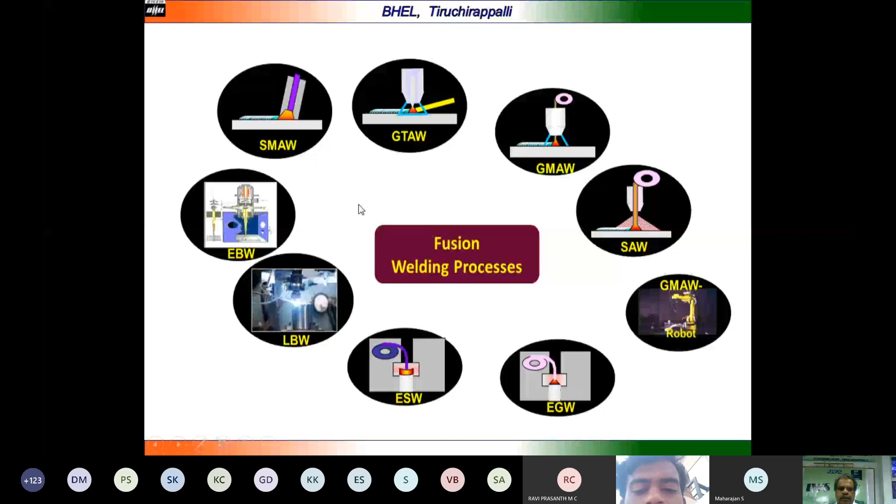Coming to the solid state welding processes: all resistance welding processes, projection welding, resistance spot seam welding, flash butt welding, friction stir welding, MIA welding - all these constitute the solid phase welding processes.

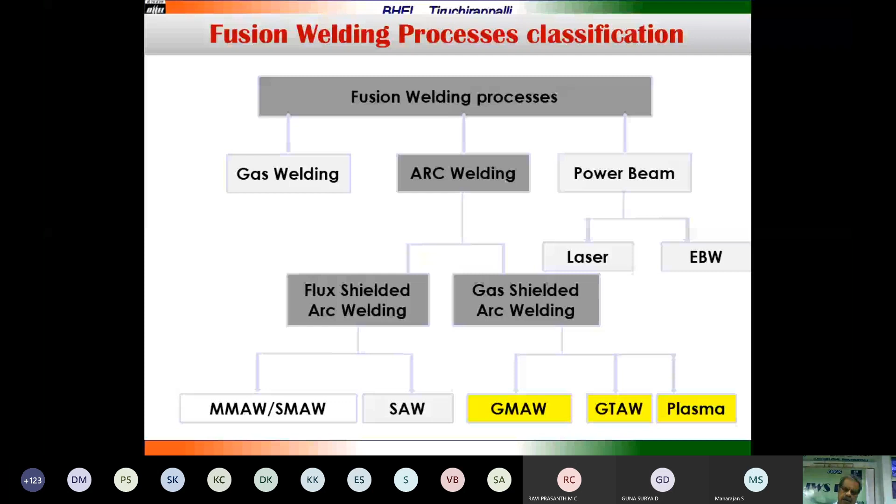For fusion welding processes, what is the source of energy? If gas is the energy source, it is gas welding or beam welding, as we discussed. Mainly we work on electric arc welding, which can be classified as flux shielded arc welding as well as gas shielded arc welding processes. Our focus now is on gas metal arc welding, gas tungsten arc welding, and plasma arc welding, where we will have an overview of the fundamentals of the process to refresh ourselves, and then see some of the advances happening in the process.

Gas tungsten arc welding process can be classified as tungsten inert gas welding or TIG welding, and plasma arc welding, where the tungsten electrode is used for transferring energy. Gas metal arc welding can be called metal inert gas welding, MIG welding, and metal active gas welding.

So first let us see the fundamentals of gas tungsten arc welding. It is called TIG welding, argon arc welding, or helium arc. The heat source is an electric arc between a non-consumable tungsten electrode, as you see on screen, and the workpiece. The filler metal is added independently, or it may be an autogenous welding, depending upon your design.

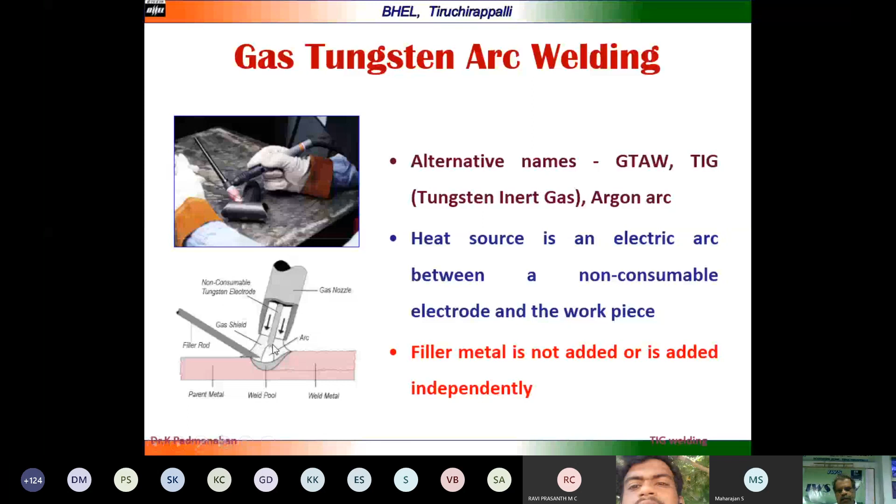The equipment for TIG welding includes the power source, the welding torch, and the gas supply unit, whether it's argon gas, helium gas, or an argon-helium mixture - whatever shielding gas you are using - and the gas control, gas flow parameter controls, flow meter and pressure valve. Then we have a control system.

Then the torch - if it's a water cooled torch for heavy duty applications, it will have a water supply system, along with a high frequency unit. The uniqueness of TIG welding is that the arc can be initiated using a high frequency unit, where the tungsten electrode need not touch the job to start the arc. That is a major advantage of the process, which is why it is used as a quality process.

This high frequency arc welding uses 3000 to 5000 volts current and 2.5 to 3 million hertz frequency given as feed, and then the arc is initiated. Once the arc is initiated, the welder can continue the arc and then continue the welding.

It uses a non-consumable tungsten electrode, and helium and argon, or helium or argon, used as shielding gas. No slag or spatter is present in the process, and welds can be made with or without filler metal, producing a high quality weld.

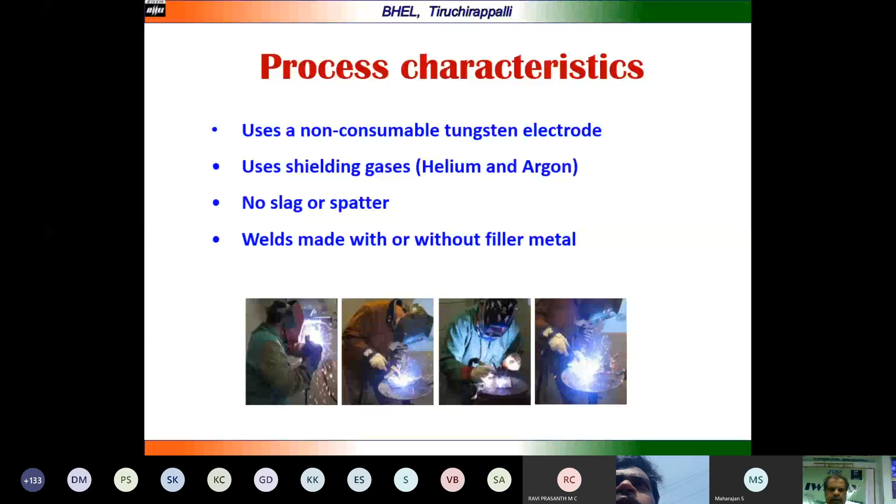The advantages are it is a clean weld process, since there are no fluxes involved, and it is good for root pass welding, especially in pressure parts and line pipe welding everywhere. It can be used for all position welding, with low heat input, therefore chances of distortion are very low. It is best for aluminum and magnesium alloys. Nowadays friction stir welding is taking over for aluminum as one of the best processes, and it produces very high quality and superior welds.

But along with the advantages, there may be some limitations or disadvantages with the process. The equipment cost is a little bit higher compared to the SMAW process, because of the high frequency unit and the water cooled system attached.

Higher welding cost due to shielding gas compared to SMAW process. The deposition rate is very low in conventional TIG welding, and the welding speed is also very low. In manual TIG welding, hand movements are restricted because the welder has to coordinate both hands with eye coordination, which makes it a slow process.

Higher welder fatigue occurs because hand-eye coordination is very critical for this process, since the welder has to hold the torch in one hand, and if filler wire is added, hold the filler in the other hand, then manipulate the welding. It requires highly skilled welders, and it is less economical than consumable electrode arc welding for sections more than 3 mm. That is why usage is restricted to root pass welding, or at worst, hot pass over the root pass welding.

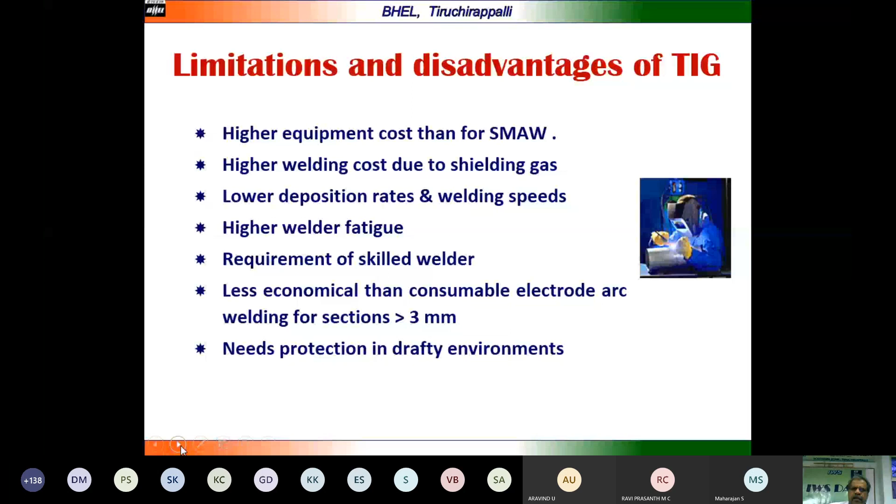What are the polarities or currents we can use in TIG welding? We can use DC electrode negative, electrode positive, as well as AC current. AC is mainly used for welding aluminum alloys because of the self-cleaning action happening there, and welding also happens there. The advantages of DC electrode negative, electrode positive, and AC are shown pictorially here on the screen.

If you take DC electrode negative, the positive ions move towards the electrode and the electrons come towards the job, and 70% of the heat is available at the work part, and 30% at the electrode end. That's why we get deep penetration and a narrow bead width, and it has excellent electrode capacity -- even using a 3.18 mm electrode, you can go up to 400 amps current, because only 30% of heat is available at the tungsten electrode. Coming to electrode positive, there is oxide cleaning action.

Electrons moving away from the job clean the oxide layers over the job, and then positive ions come and make the penetration. Here, 30% of heat is at the work and 70% at the electrode end. Because of that, we get only shallow penetration and a wider bead width. But look at the current -- even with a 6.35 mm electrode, we can use only 120 amps current. That is the issue here.

AC is balanced -- 50% of the time it is DC electrode positive and electrode negative, so both benefits can be obtained. 50% of the time the job gets cleaned, and 50% of the time welding is done. Heat input is also distributed equally between the job and the electrode, and the penetration is medium. For a 3.18 mm electrode, we can use up to 225 amps current.

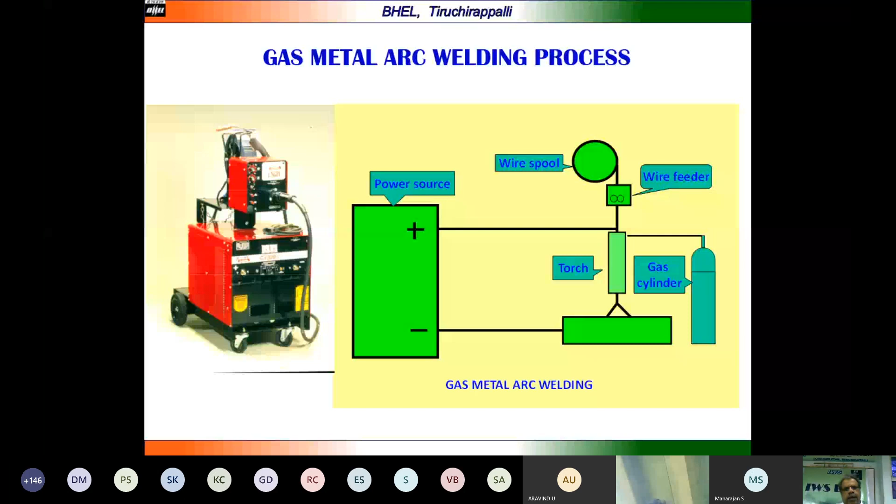The gas metal arc welding process can be classified as metal inert gas welding process and metal active gas welding process. Inert gas welding is when you use purely inert gas like argon or helium, and it can be used for welding non-ferrous metals, especially aluminum and copper. MAG welding with 100% CO2 or argon plus CO2 mixed gas can be used for all types of ferrous materials and steels.

How much percentage of argon and CO2 can we use? For conventional structural welding, we can use 80-20%, that is 80% argon and 20% CO2. When it is for pressure parts, made as per ASME or other codes, working at high pressure and high temperature environment, it is better to go for 90-95% argon. So increasing the argon percentage is for pressure applications, and for structural application we can have 80% argon, 20% CO2. Mainly for automotive components 80-20 is used, but when going for pressure parts like ASME, the CO2 ratio comes down.

The special features of the GMAW process are high current density, and the arc is a self-adjusting arc. Because of the current feed, the arc length can be maintained - this is a property of the process. If the wire feed is more, the current will slightly increase and maintain the arc length. If the wire feed is less, the burning rate will slow down, and the arc length can be maintained easily in the semi-automatic welding process.

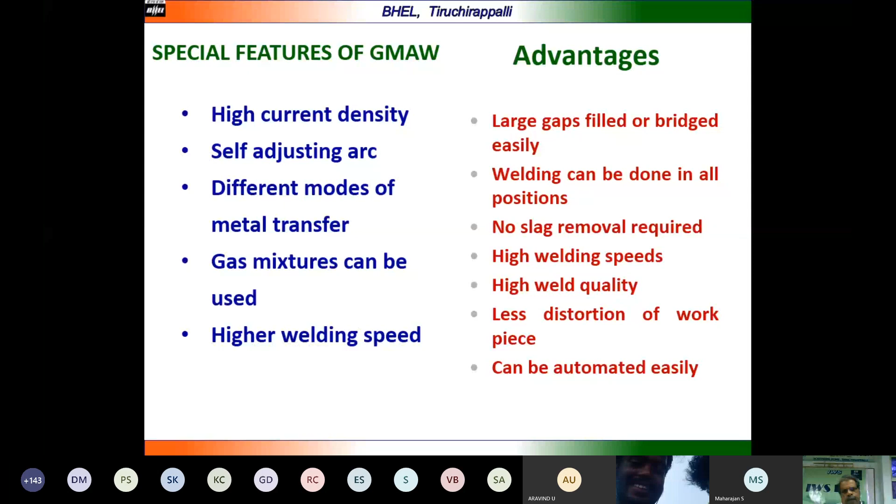The important process parameters are current, voltage, standoff distance - the distance between the tip of the electrode and the job - and the inductance level and gas flow rate are very important parameters when working with this process.

As mentioned, there are 3 modes of metal transfer: short circuit transfer, used for low current and low thickness jobs; globular transfer, which is intermediate; and spray transfer mode, which is continuous. You can see the difference in how metal is getting deposited in all 3 modes.

Watching the videos, in the first one the metal droplet forms, gets short circuited, then gets detached - it's a slow welding process, but it can be done in overhead position also. Globular is in between, but we normally don't use the globular welding process. For productive work, spray arc welding with spray transfer is mainly used.

You can see continuous spray of metal droplets into the weld metal. Because of that, the weld quality and weld metal deposition rate are very high, and very high current can be used with this process. But short circuit transfer can be used in overhead position also. This shows the voltage and current region schematically for short circuit, globular, and spray transfer, and the transition where globular transfer converts to spray transfer for high productive applications.

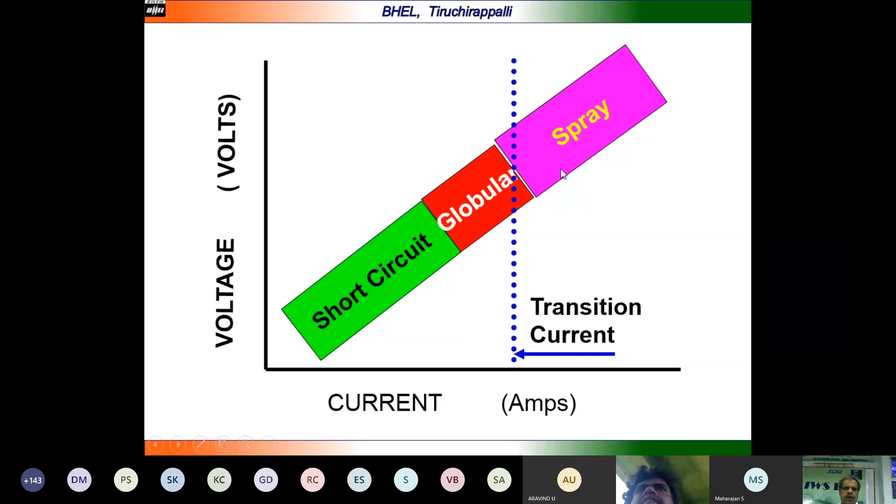The next process in gas shield welding is plasma welding. It was developed in the 1950s in the USA using helium, and in the former Soviet Union they did it with argon. It is sometimes known as tungsten plasma welding. Here the difference is there is a tungsten electrode and plasma gas, and heat is transferred through the plasma gas, with filler wire added. This can be used for surfacing, cutting, and welding applications, and the protective shielding gas is given through the torch, so the torch size will be a bit higher. You take the plasma gas as well as the shielding gas, and welding, cutting, or surfacing can be done depending on the need and parameters.

What is the difference between TIG welding and plasma arc welding? In TIG welding, there is a shielding gas flow, a tungsten electrode, and the arc is transferred between the electrode and the job, and the welding happens here. The temperature is less than 15,000 degrees Celsius.

In plasma arc welding, the temperature can go up to 30,000 degrees Celsius. You can see the construction of the torch here: the tungsten electrode, the plasma gas emanating from there, and the shielding gas providing protective shielding to the weld pool. Plasma arc welding is basically an extension of the TIG welding process.

The arc gets constricted by a nozzle and transferred to the base material, and the plasma beam consists of an accelerated ionized gas jet, as shown on the right hand side, and this is a tungsten arc.

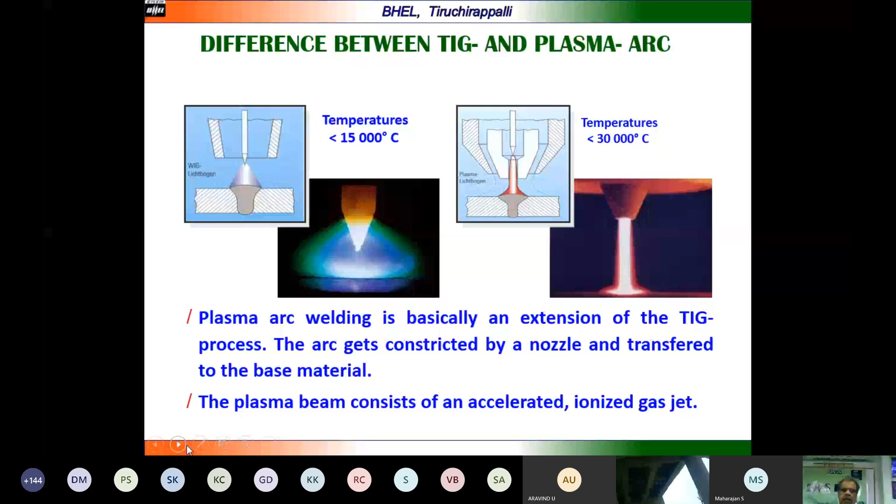The arc is independent of the workpiece, and the workpiece does not form a part of the electrical circuit. It has comparatively less energy density compared to transferred plasma arc, and is employed for applications involving ceramics or metal plating and spraying. A non-transferred arc is initiated using an HF unit in the circuit.

Coming to the transferred arc, it possesses high energy density and plasma jet velocity, employed for cutting as well as melting metals like carbon steel, stainless steel, and non-ferrous metal. It can also be used for welding at high arc travel speeds.

For initiating a transferred arc, a current limiting resistor is put into the circuit, which permits a flow of about 50 amps between the nozzle and the electrode, and a pilot arc is established between the electrode. Then the pilot arc touches the job, main current starts flowing, and then the plasma arc is initiated.

High energy density keyhole mode plasma welding is used for deeper penetration, and high arc stability can be achieved by this process. Weld quality is insensitive to the arc length. No tungsten inclusion is possible in the weld, which can happen in the TIG welding process because the tungsten electrode comes into contact with the job.

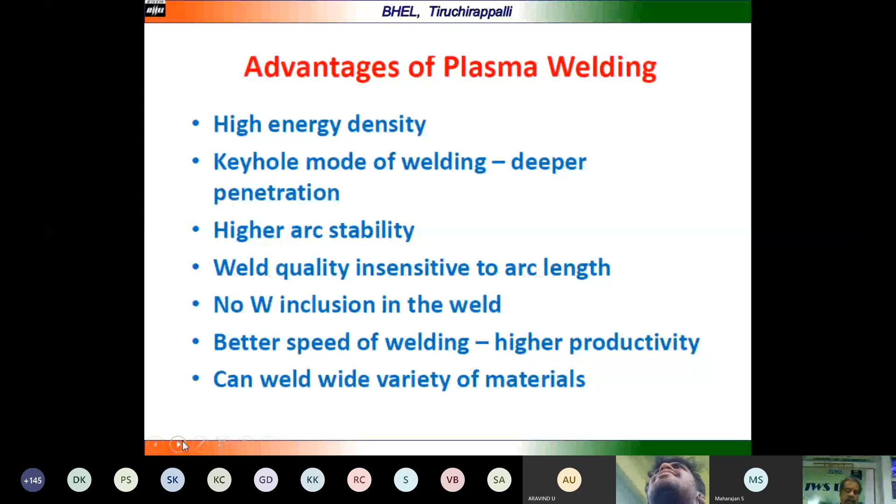Advantages include better speed of welding, ability to weld a variety of materials, and cut and weld surfaces. Limitations: relatively expensive and complex equipment because of the torch and the shielding gas, plasma gas, everything. It has complex welding procedures to establish, less tolerance for fit-ups, and higher operator skill is required compared to GTAW. Orifice replacement is necessary at intervals in this process.

Plasma gas can use argon helium mixture or argon hydrogen mixture, depending upon the application. For all metallic materials, argon can be used. Argon helium mixture can be used, and argon hydrogen mixture can be used for unalloyed and austenitic steels.

AC and DC can be used. Shielding gas is required: argon, helium, hydrogen, or argon-helium can be used depending on the requirement, because helium gives deeper penetration while argon does not give that much deeper penetration. But the quantum of helium gas consumption will be more compared to argon in the case of TIG welding.

So when you want high penetration welding, or deeper penetration, you have to go for helium gas. For example, to weld a 7.4 mm thick aluminium AA2219 aluminium alloy with square butt edge preparation without root gap, and the weld should be completed in a single pass, then the shielding gas we use is helium gas, and we establish the parameters.

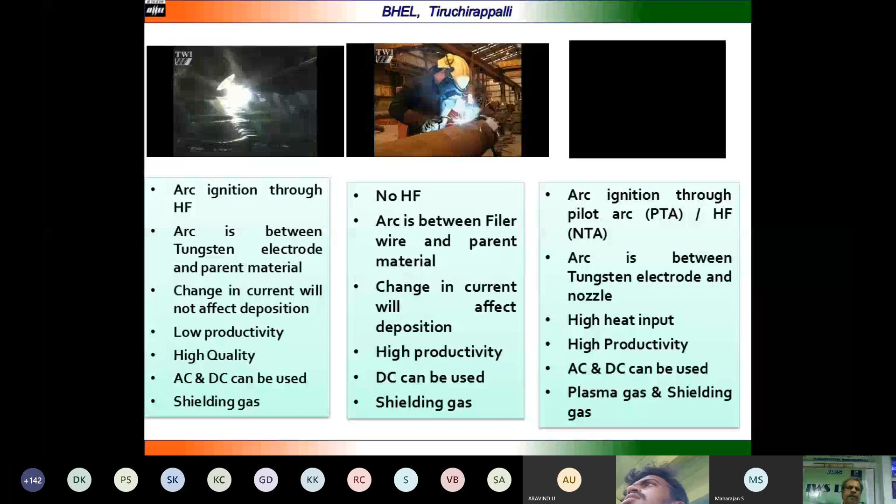So for deeper penetration and good quality weld, we can go for helium, but the cost is high and the gas consumption is also high there. But in argon, there is commercially pure argon available.

High quality pure argon is also used for nuclear applications. Argon is cheaply available and widely used, and it's better to use as much argon as possible, slightly sacrificing penetration, but by adjusting parameters we can achieve it.

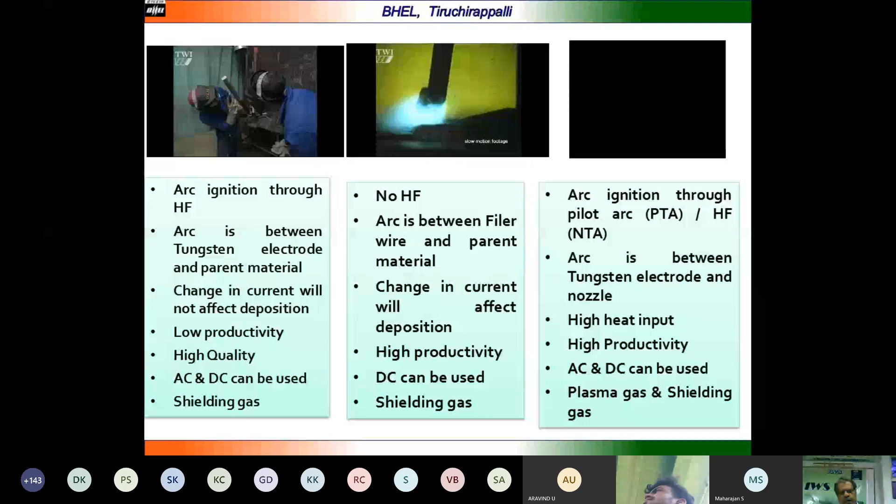Coming to the GMAW process, there is no high frequency unit. The arc is between the filler wire and the parent metal. There is a change in current because any change in current will affect the melting rate, and the deposition is going to get affected. It's a very high productive process, and DC, direct current, can be used. The shielding gas can be argon, helium, argon-CO2 mixture, or 100% CO2, depending upon the application.

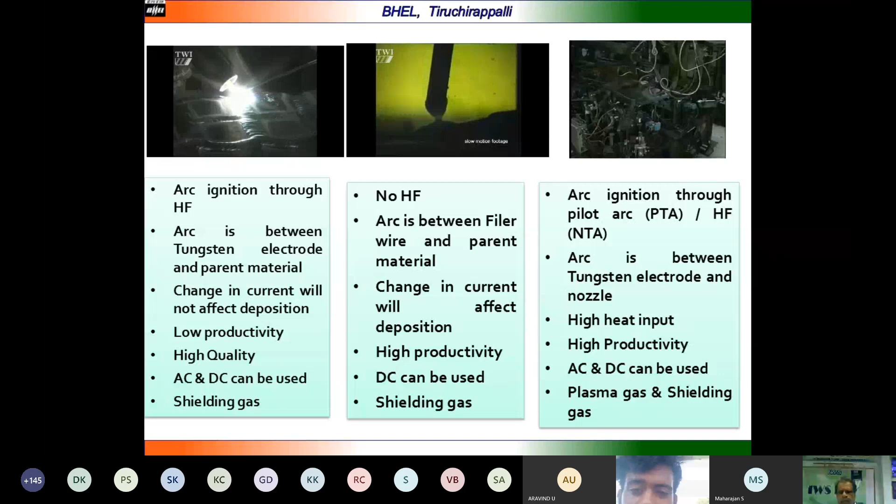Let us take the advances in the GTAW process. We'll have an overview, then move on to the GMAW process, and finally to plasma welding.

Pulsed TIG welding is the first development in the TIG welding process. In place of conventional TIG welding, where continuous current flows, here we have, as in any pulse mode, a base current and a peak current, with base current time and peak current time.

So more heat input can be given, heat density can be given, but overall lesser heat input goes into the material, avoiding heat input related defects at a later stage.

In pulsed TIG welding, the number of pulses will be in the range of 0.2 to 20 hertz. Background current is a lower level of current where heat is dissipated, in the range of 10 to 90 percent from the peak current, and the on-time can also be set. By varying these parameters, we can get very good welds using the pulsed TIG welding process.

Advantages: deeper penetration can be achieved because we can go to very high peak current for a short time, and the metal can be deposited with lower distortion since total heat input is very low. Bead geometry can be controlled easily, and because of the low heat input, mechanical properties are much better than conventional TIG welding. The weld can be frozen quickly, and solidification happens easily.

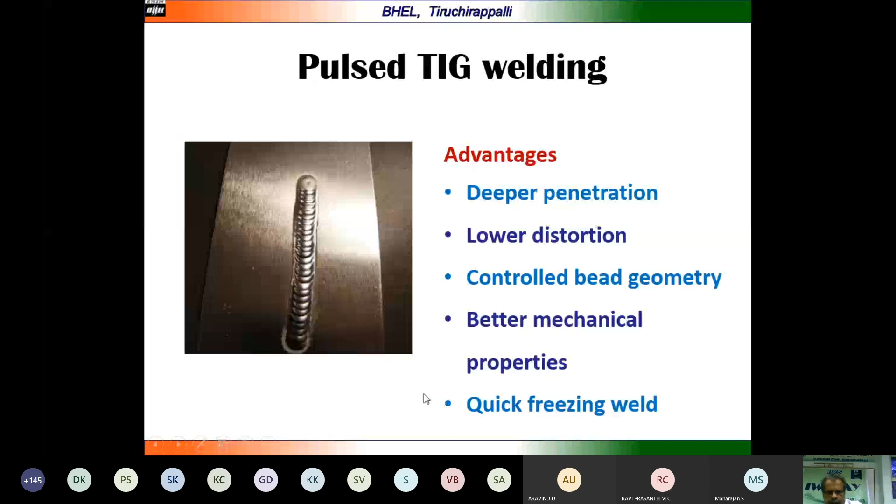The next development in TIG welding is orbital TIG welding, needed for in-situ welding of tubes and pipes, especially welding in 5G position, where the job is stationary and the hand must move to do the welding. Instead of manual welding, the torch can be rotated to complete the welding. This is called orbital TIG welding, and it is much suited for tube-to-tube sheet welding.

But once the parameters are set and established, it produces a high quality weld continuously without any problem, and we can rest assured about quality. Much of the radiographic quality welding for tubes and pipes in-situ is done using this process.

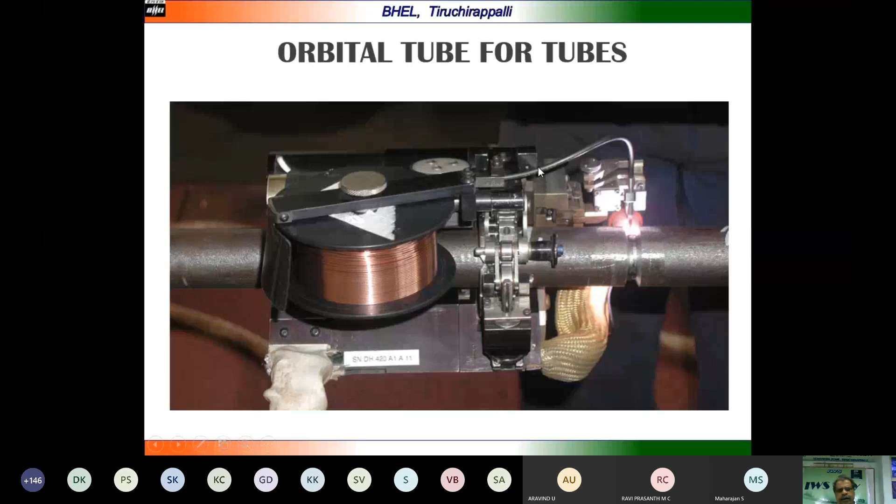Some of the equipment available for orbital TIG welding of tubes, shown here in a closer view. You can see the welding tungsten electrode, the arc, and the wire spool, a small amount of wire on a smaller size spool, which is fed into the weld. This is a head rotating system where the head rotates and the welding is done. Here's another view of the closed arc.

Smaller diameter tubes, from 3mm to 12.4mm, can also be welded using this process. It is orbital TIG welding for pipes. What we are seeing here, similar tubes, the pipe can be bigger size, and the head moves over the ring, with welding done in many subsequent passes.

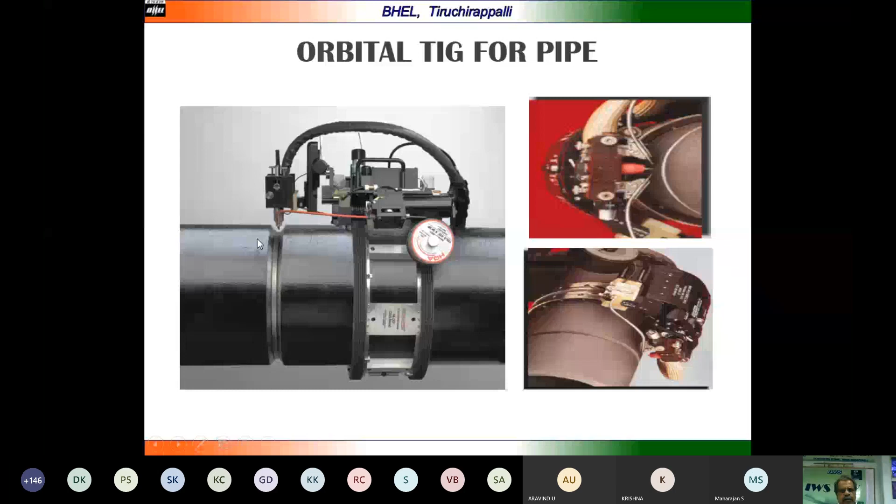The next topic is the variable polarity power source for welding of aluminum. As we saw earlier, alternating current is used for welding aluminum. 50% of the time the electrode is positive, where self-cleaning action takes place, and 50% of the time the electrode is negative, when welding actually happens.

Instead of having 50% cleaning time, that time can be minimized so that deposition time increases and the quality of the process improves. Variable polarity power sources have been developed so the timing of the positive part can be reduced, increasing the deposition rate compared to conventional AC welding.

This is another important development: the activated TIG welding process. So far we said there is no flux involved in TIG welding, but here flux is involved. This flux does not produce any slag, and it gets consumed during the process. It is a wonderful feature of the activated TIG welding process.

Activated TIG welding is a process that involves application of a thin coating of flux material onto the joint surface prior to welding, to enhance weld penetration.

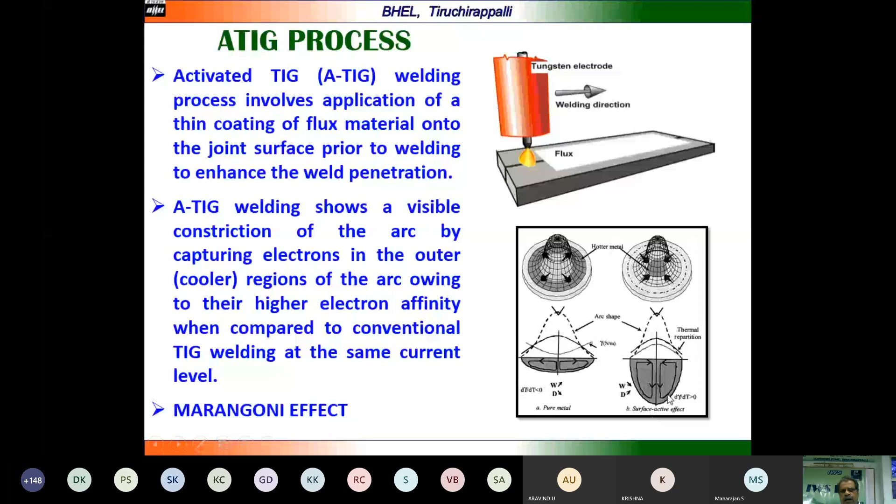Up to 7mm carbon steel can be welded in a single pass. This is what we experimented with, and I was involved in a project to develop this for up to 7mm wall thick tubes of carbon steels and alloy steels. We welded 7mm successfully in a single pass with square butt edge preparation.

There is no need for any edge preparation other than a square butt edge. No root gap is required, and it reduces shrinkage and distortion allowances. You can see the bead width is also very less here, and the amount of filler metal and gas consumption is also reduced.

Instead of welding in 3 or 4 passes for a 6mm or 7mm tube, you can weld it in a single pass, meaning there is a reduction in consumption of gas, consumables, everything.

That is the advantage of the process, and this process can be used for any material now, because fluxes are available separately for titanium, aluminum, stainless steel, and all types of steels. So the fluxes can be procured and used, and it is very simple to use.

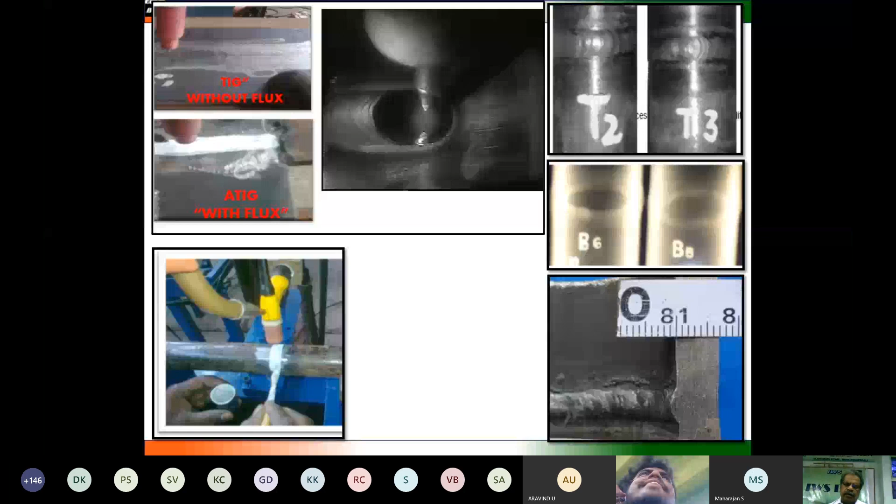Another development is the TIP TIG welding process. In the conventional TIG welding process, the welder has to hold the torch in one hand, the filler metal in the other hand, then watch and do the welding. It was cumbersome and fatiguing.

Now there is a development over that called TIP TIG, or hot wire TIG, where a continuous wire can be fed through the arc itself, the arc is initiated with the tungsten arc, and the filler wire can be continuously fed. Now the welder can do the welding continuously without any problem, and it becomes like a GMAW process for him.

The weld wire motion creates a vibration in the weld wire. The wire vibration agitates the weld pool, changing the rapid solidification, and as the weld pool increases the receptivity, the TIG weld pool receives more filler wire than the regular manual or automated TIG welding process. That is the advantage of this process.

Consistent TIP TIG wire delivery reduces start-stops, keeps things consistent, there are no start-stops actually, and it provides even wire melting and more consistent weld fusion quality. These are the advantages. It can be used for welding of stainless steel, aluminium, cladding application, automation, tracker mounted, twin welding — everything can be used with this application.

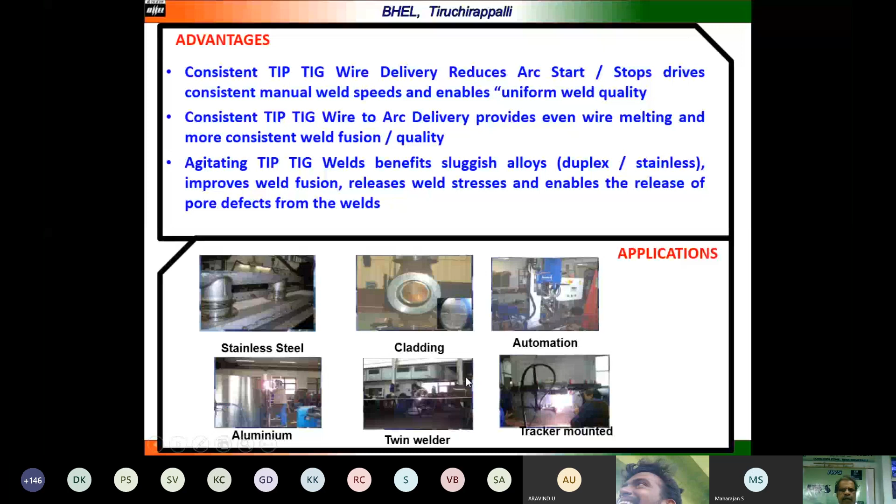What you are seeing here is the tungsten electrode, with the filler wire coming in for welding a pipe joint. The welder is making the weld, and the weld can be completed, and you can see the penetration here in the inside weld, inside the pipe.

This is the TIP TIG welding process for trials conducted by our team, and it is a live example of application of the TIP TIG process. When there was a problem in the turbine casing, some wear-out had happened. To build up that area, this process was implemented successfully, the welding was done, and the job was restored and put into use — it is running for so many years.

The next development is keyhole TIG welding, or K-TIG welding process. It was originally developed by Dr. Laurie Jarvis of Australia in the years 1990-93. It is yet to take root in India, but some people are working on this and trying to bring in the process for industrial application in the country.

To my knowledge, maybe 1 or 2 machines may be working, but it has to take root in all areas. It is a novel TIG welding process that takes advantage of the arc forces and surface tension to create a robust full penetration weld. The arc opens a hole through the plate as you are seeing here, and the surface of the weld pool becomes anchored to both the top and bottom surfaces to form a stable structure, and the stable arc moves along the path as a keyhole.

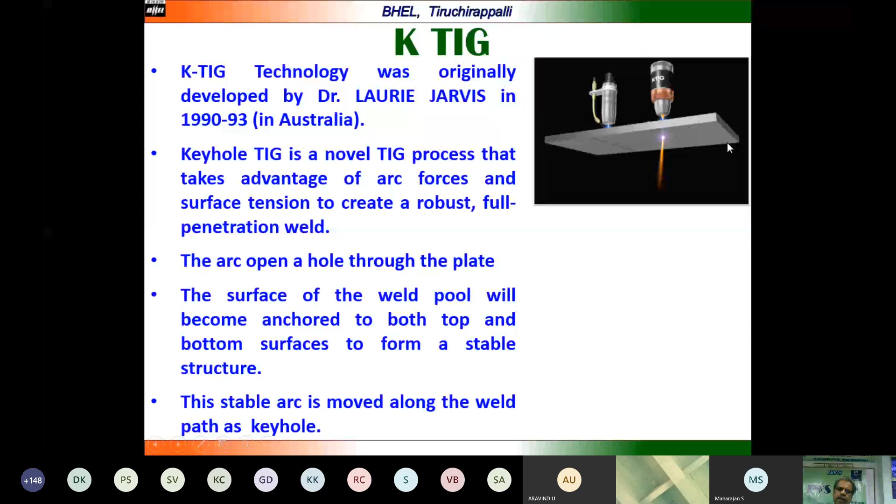A keyhole plasma — it is keyhole TIG welding where the welding can be done for deeper penetration. It is a very fast process. Up to 16 mm, the claim is that it can penetrate easily in a single pass with square butt edge preparation, much better than activated TIG welding, where I mentioned 12 mm stainless steel — here it handles 16 mm stainless steel. Minimum consumables can be used, it is cost effective, and automation is also possible with this process.

It can be used for shipbuilding, railway wagons, pipe manufacturing — all these processes. This is the advantage of this process.

When we are comparing keyhole GTAW to conventional GTAW for stainless steel of 10.5 mm thickness, 304 stainless steel, there is a close square butt joint without any root gap, and a single V edge preparation with root gap.

50 gram filler addition is required when using conventional GTAW, whereas we require only 1 gram of filler for keyhole TIG welding.

One pass at 300 mm per minute and 7 passes at 200 mm per minute have been made. Arc-on time is 3 minutes 20 seconds, whereas in conventional TIG it is 35 minutes. Almost one-tenth of the time, the welding can be completed easily with the same or improved quality. This process can be used as an autogenous process as well as with filler wire.

Some of the macrographs are shown here with conventional TIG welding. Macrographs of K-TIG welding and conventional TIG welding are shown here for titanium, and this is K-TIG welding of a 10 mm thick Inconel 718 plate.

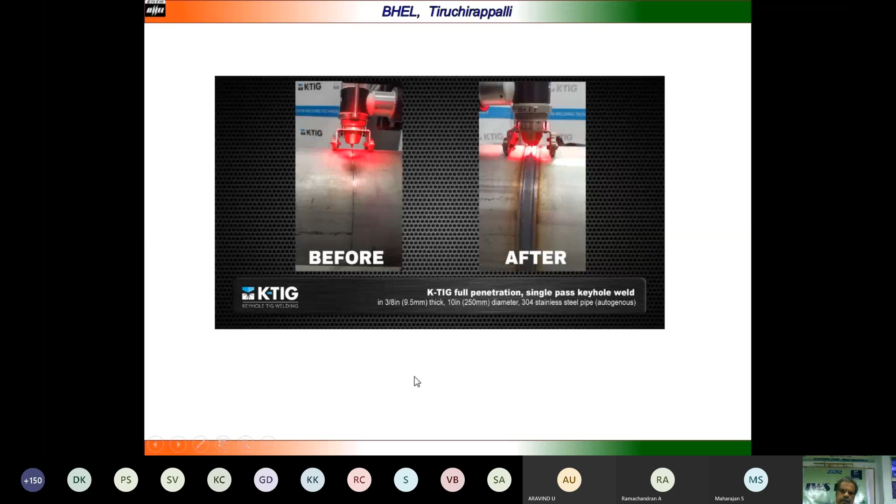That is the advantage of keyhole TIG welding. You have to see and understand this from the video.

Now let us move on to the next process, called interpulse TIG welding. It's a new dimension in welding aluminum, stainless steel, and titanium alloys, and is an advanced modification of conventional TIG using magnetic convection and high frequency modulation of the arc waveform at about 20,000 Hz. A second pulse process is added to the base pulse, and it was developed by VBC Instrument Engineering. It is a patented technology of theirs.

It offers much higher quality welds and control over inverter technology. The software created makes TIG welding less reliant on heat sinks, and this was also kept to a minimum here.

What you are watching here is the system, and I think 3 or 4 such systems are available in the country. C-MAG is having one system, I think, and DMRL is having another, to my knowledge - we have to check it actually. But I'm sure that C-MAG and DMRL have got it. Others have to check. The agent is available in Bangalore, who is supplying this.

This is the conventional TIG welding process, and this is interpulse TIG welding. You can see again the bead penetration and heat input - that is where we are working on it. So minimizing heat input to improve weld quality is the motto of all these things.

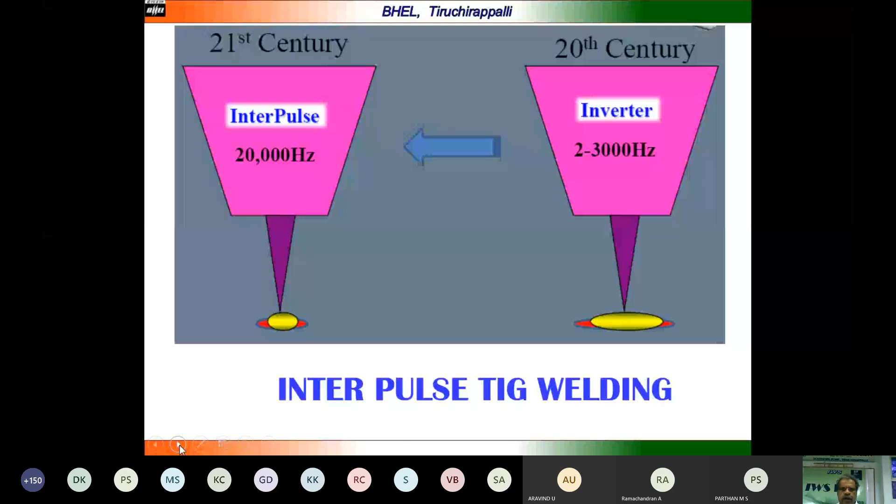This is the conventional DCR, and this is the interpulse TIG welding arc. You can see the advantages here: scaled up weld and welding quality similar to the TIG welding process, welding speed as high as in MIG welding, and exact manipulation of the scaled weld can be done.

Reduced heat input to the material, distortion of the workpiece can be reduced, easily adjustable, and it has very good quality. You can see the bead width of the interpulse weld versus conventional TIG welding - 7 mm versus 3 mm here. The heat affected zone is 15 mm here versus 7.5 here. These are the advantages of interpulse welding, where you can weld very small thickness titanium and other alloys very easily.

The other development happened in GTAW and GMAW processes. In TIG welding also, narrow gap technology is established, and now it has taken us to narrow gap hybrid TIG welding technology, where hybrid technology and narrow gap technology are combined as a hybrid process, with more advantages. What you are seeing is a narrow gap weld groove and the weld technology, and narrow gap technology reduces weld metal consumption and other things.

The only difference is the torch cannot be a conventional torch - it has to be a flat torch designed properly to go deep into the groove, and welding can be done very easily. The wire feed and the torch both should be flat type, not circular type.

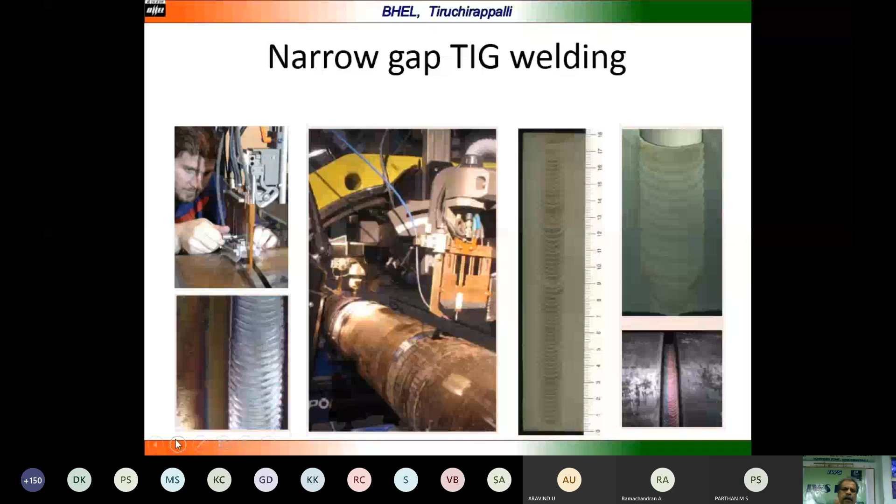The video shown is a narrow gap video, an advanced technique for higher productivity in the manufacture of thick walled components, developed to achieve similar corrosion and fatigue properties for both weld and base metals without porosity or inclusions. And the electrode will be oscillated.

The advantage is that the electrode can be oscillated in the narrow groove by twisting the torch tip, ensuring penetration in all places, with no lack of penetration between the side wall. There will be no lack of fusion between the side wall and the job, and between the passes, because of the twisting of the torch.

What is happening in this process? What you see here is the narrow gap TIG welding process, and you can see the torch getting oscillated. Because of the oscillation, it ensures penetration on the side wall, so there will be no lack of fusion on the side walls. That is the advantage of this technology available now.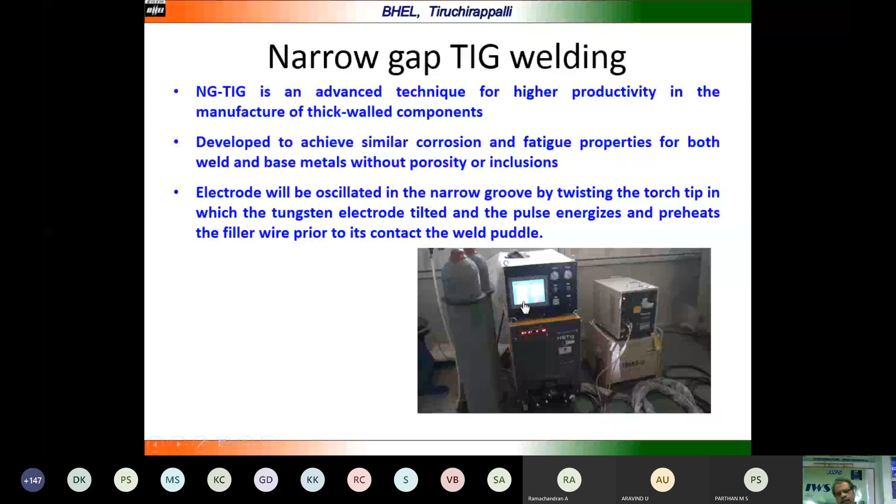Even the welder can monitor this parameter in the weld. They are fixing a camera inside, so the welder can monitor the weld via the camera. Then you can make adjustments while watching, and see the fine weld made using this narrow gap TIG welding process. It can be hot wire also, cold wire, hot wire also, no issue.

Narrow gap reduces the weld metal volume, shortens the welding time, and lowers heat input. All these advantages happen together. You can see various designs of narrow gap torches, where we can work it out depending upon the application. We can develop the torch and then work on that.

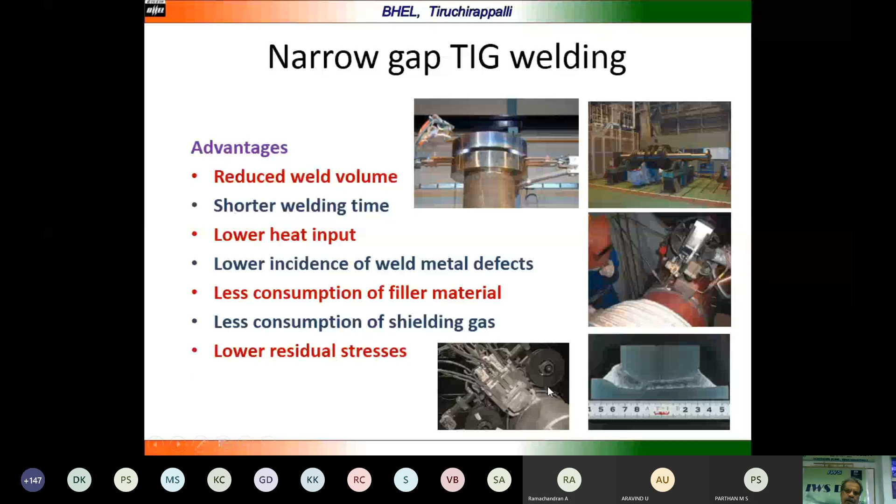The other development is hot wire technology. So far we saw only conventional TIG welding, where cold filler wire is added. Here, a small transformer-type power source is added and connected to the filler wire, which is heated almost to melting temperature. When it enters the weld pool, it melts very quickly, so penetration and deposition rate can be increased, making it as close as possible to MIG or GMAW welding. That's a major advantage.

This process is now used for welding. Even thick plates or thick shells can be welded using this hot wire narrow gap TIG welding process.

Deposition rate is almost 7.25 kg per hour, and it may be more now. In flat position, 1.36 kg per hour has been achieved in horizontal position. Better control of heat input and reduced dilution are advantages of this hot wire narrow gap TIG welding process. It offers high quality, no spatter, small heat affected zone, and is used for narrow gap welding with manual or automated motions.

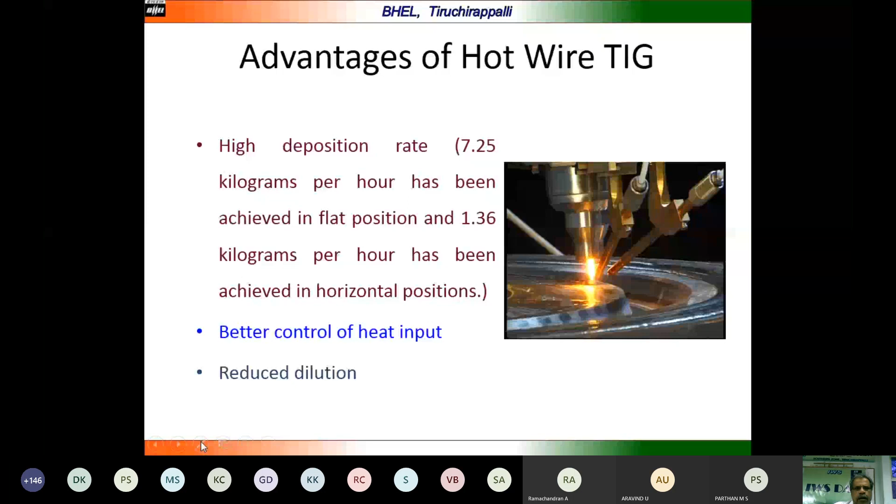This is hot wire TIG welding shown again, the narrow gap hot wire TIG welding process. As I told earlier, it's a hybrid of orbital TIG welding, narrow gap welding, and hot wire, all three added together, so pipes can be welded very easily. What you are seeing is the application of a hot wire system with TIG welding, the wire feed here, and this is a pipe in which the welding is performed using the hot wire narrow gap orbital TIG welding process.

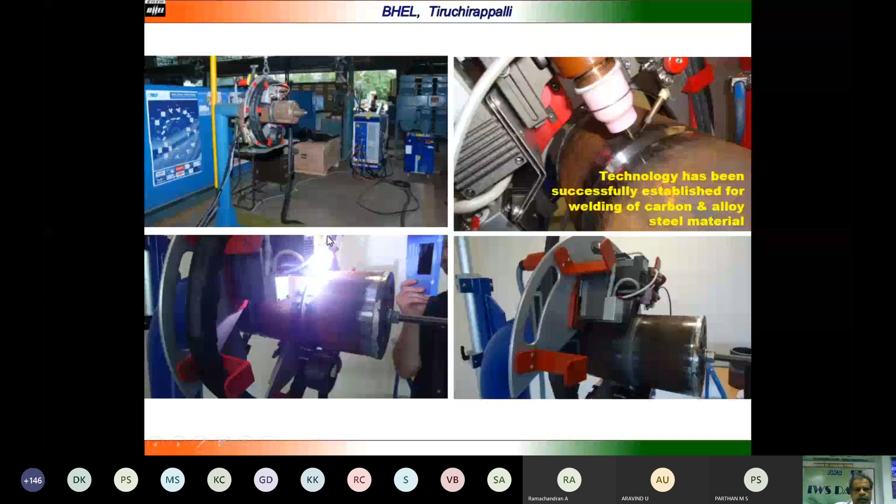This is the setup here. What you are seeing is the power source, everything is here. It's like conventional TIG welding; the only variation is here with the filler wire. Here's another figure showing this.

Other advantages include TIG cladding, which is now taking place, and twin torch tandem TIG welding, where two electrodes and two filler wires can be added to the material. This can be used for deposition or weld metal, and even 3D printing now uses this process. It can be used for surfacing or cladding as well as for welding. This is tandem TIG welding.

This is a very latest development in this technology - inside TIG, actually called inside tube TIG welding. When welding a pipe joined to a sub, instead of welding from outside, you can put a small torch inside and perform the welding from inside. These are the developments, but it is yet to take root in India. I think Fronius and a French company are involved here.

They are supplying these systems nowadays.

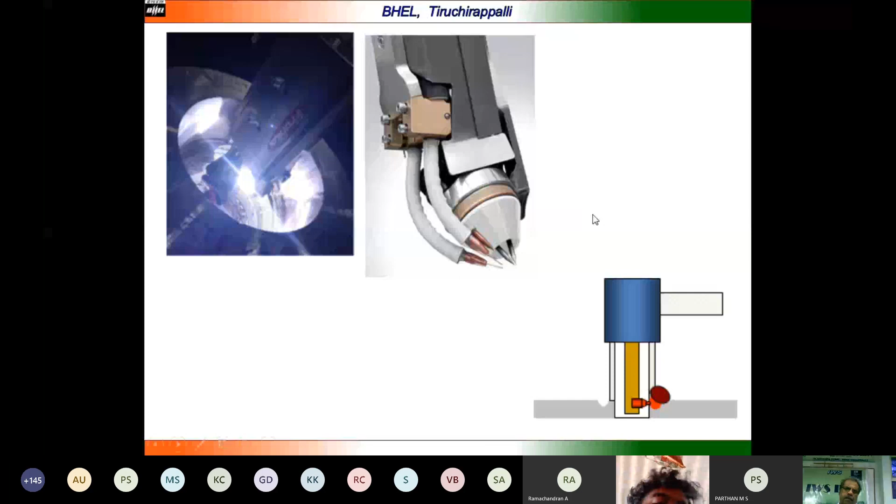These are some of the advantages and advances that happened in the GTAW process. Maybe I have not touched all the things, but whatever came to my knowledge and work where I was involved, I shared with you. Now, with your permission, I will move on to advances in the GMAW process.

Electrogas welding was first developed in Russia in the late 80s and 90s. Electrogas welding is actually related to electroslag welding. It is a hybrid variety of the electroslag welding technology combined with the GMAW process. Electrogas welding also welds plates in vertical position with a square butt joint, using a copper shoe and similar setup. Instead of electroslag and filler metal, here the GMAW wire is fed, and the welding can be done.

The major advantage of electrogas welding is less volume of weld metal, with only minimal preparation needed even for a 38 mm thick plate, and faster welding speeds can be achieved. When using electroslag welding, because of the nature of the weldment, we normally have to go for a normalizing operation, a post-weld heat treatment. Once you do normalizing, the base metal may sometimes lose its fundamental properties. To avoid that, electrogas welding can be used instead, where there is no need for normalizing. Only a simple post-weld stress-relief heat treatment is necessary when using electrogas welding. Very good mechanical properties can be achieved in the as-welded condition.

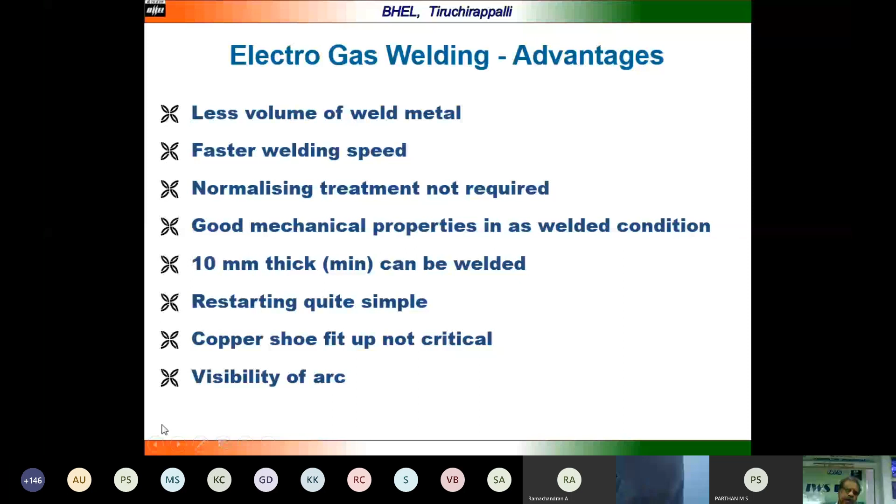Advances in GMAW processes can be called the latest development through electronics and IT, which has helped the welding industry a lot. There are waveform-controlled GMAW power sources developed, like Surface Tension Transfer, which is the mother of all waveform-controlled power sources, by Lincoln Electric, called the STT process. There's also the Root Metal Deposition or RMD process, Cold Metal Transfer by Fronius, and FastROOT by Kemppi. All these are there.

There's also pulse GMAW or pulse-on-pulse GMAW, similar to pulse GTAW, and high-performance GMAW like force arc welding and tandem GMAW wire welding process. These are all the advances that have happened in the GMAW process. Let us see them one by one in the subsequent slides now.

The waveform GMAW process power sources replace the slow and low-productivity GTAW process for root pass welding, like power piping, line pipe welds, oil and gas sector, and shipbuilding. The major advantage of waveform-controlled GMAW is that it easily replaces TIG welding for root pass welding.

The weld is very clean and provides very good mechanical properties. At the same time, it is almost six times faster than TIG welding, and the heat input is also very low in this process. Because of these advantages, root pass welding done by TIG can be replaced by using waveform-controlled GMAW processes like STT, RMD, FastROOT, or FastMig.

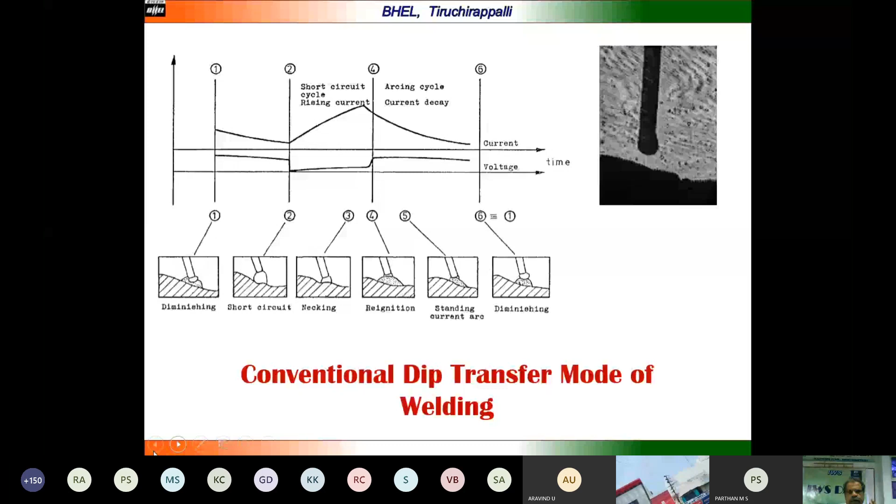The problem here is that spatter is more of an issue, and sometimes lack of fusion also happens, along with burn-through as an issue. All three of these problems are faced with short-circuit transfer welding. These are the issues we are seeing here.

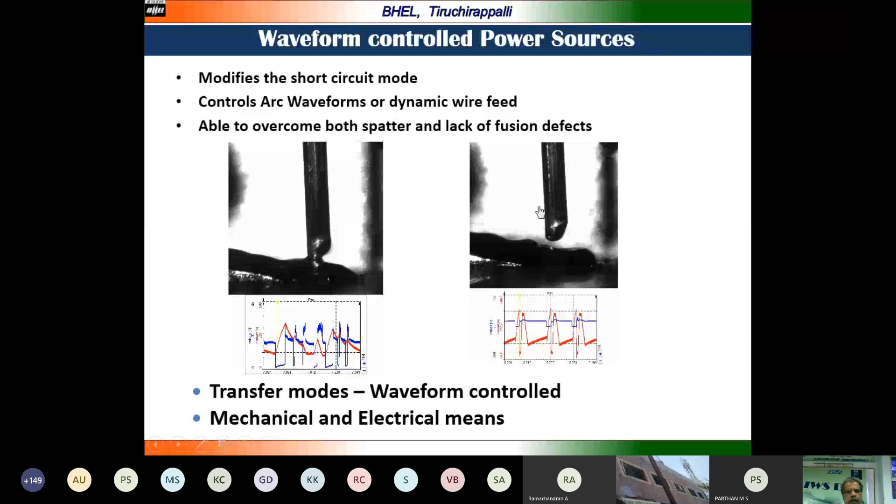Here you can see again the waveform is controlled. You can see the current here, how high it is. The current is not going continuously high, it is going in pulse current, and peak current occurs for a shorter while when it is getting deposited. This is for the STT process, a trademark of Lincoln Electric. It is called RMD by Miller, and both are the same technology, only the waveform differs. One advantage is very low heat input deposition for thin sheet application and root pass welding with higher speeds.

It's a typical STD standard MIG waveform where you can see the current and voltage here, and the current is very low. Actually, welding can be done with half of the current, and because of this, the RMD waveform is shown here. Because of that low heat input, these processes are widely used now.

Conventional CO2 produces more spatter, but with STT the spatter is very little or almost minimum.

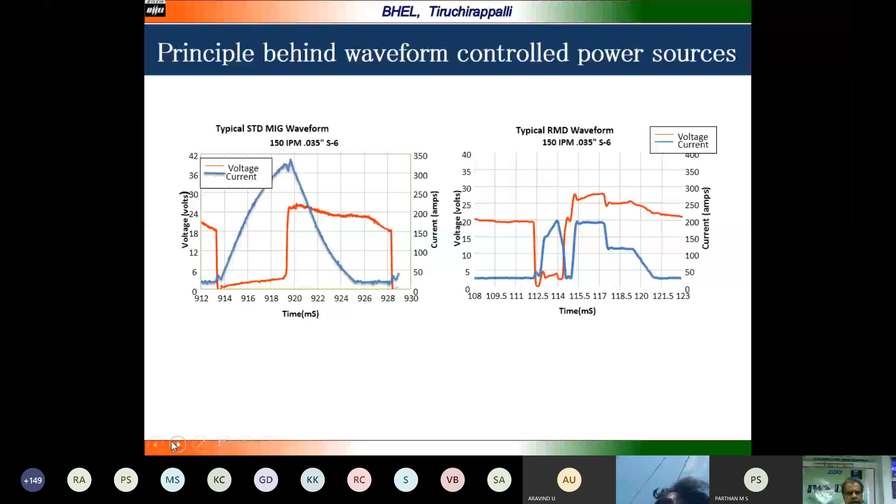This waveform control process is successfully developed and applied for welding of pipes and recipients using the STT process. The root pass is done, and the subsequent process is developed by the conventional GMAW process, and the welding can be completed. Orbital pipe welding by GMAW process can use this short circuit or modified waveform process using power sources, and the welding can be done very easily for pipe welding.

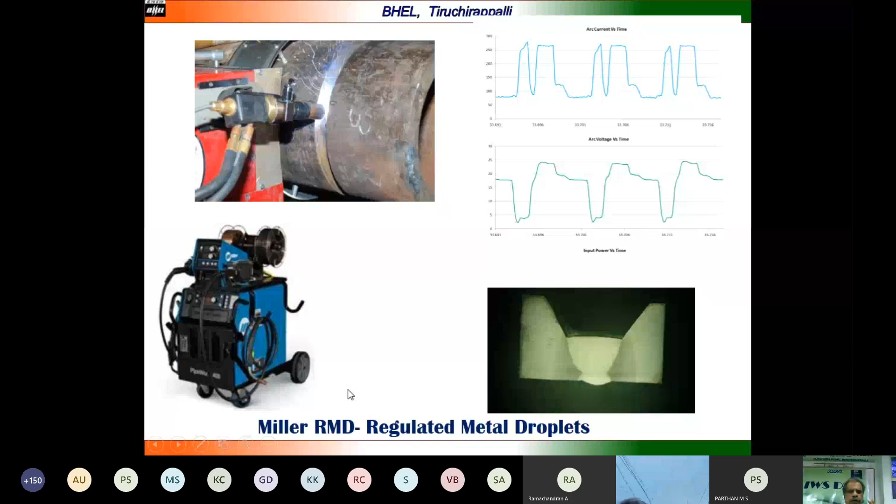Orbital pipe welding can use these processes. The waveform control root pass followed by FCAW can be used for orbital pipe weldings, and the weld quality and everything can be achieved easily, meeting the requirements. Even for power plant applications, this process can be used.

Again, orbital pipe welding is shown in the picture here, how it can be done. Welding in all positions can be achieved with this process, and productivity can be increased by 2 folds, weld quality can be improved, and consumable consumption is reduced by 20%. Line pipes and power piping can be welded using the orbital pipe welding process.

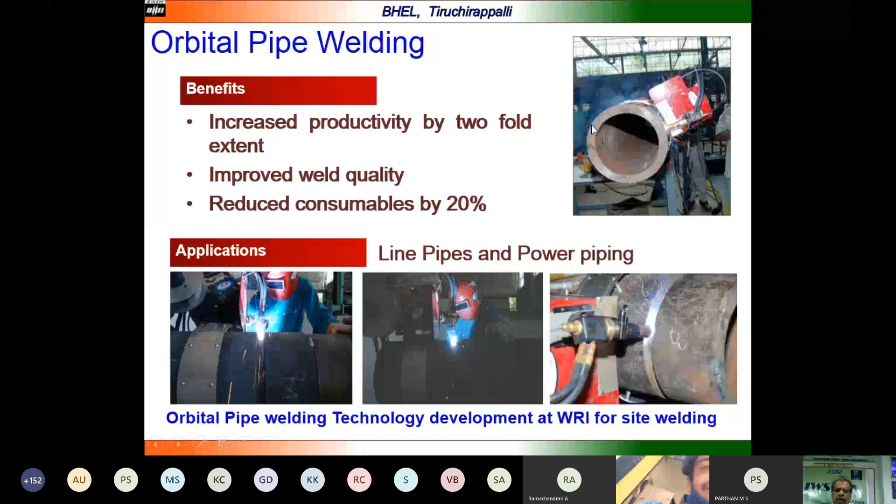One thing here: orbital welding cannot rotate fully because of the wire and other things. It can weld from 12 o'clock to 6 o'clock, and again from 6 o'clock to 12 o'clock, depending on direction. You have to change direction to do it. Because of the wire, gas line, and everything, there will be problems if rotating 360 degrees, so we rotate 180 degrees and do the welding by orbital pipe welding.

The cold arc process is developed by EWM. Similar to before, it's a modified waveform welding process used for thin sheet applications, with only the power source varying with small changes in the current and voltage waveform. The application is low heat input for welding thin sheets and root pass welding. It's used for steel root, and the waveform recorded in the analysis at Hanover by my colleague Shanta Kumari is shown here.

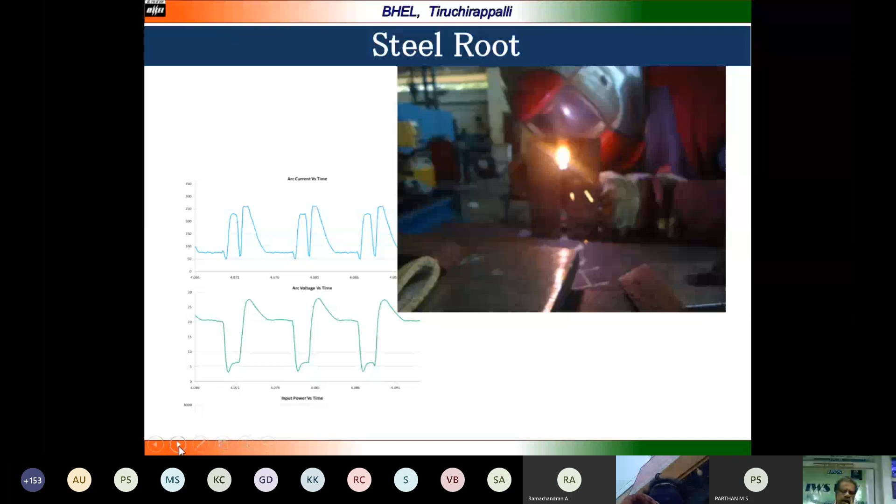Another development is called cold metal transfer technology. It is a modified GMAW process, sometimes called MIG brazing. It's a modified GMAW welding process with waveform control, low heat input, no spatter, good gap bridging, and less distortion are the characteristics.

It uses a separate power source, the cold metal power source, and it can be used with or without robotics. This can be used for joining steel to copper, which can be successfully welded using this process. Here you can see how the process is working.

A is the arcing, where the arc occurs and the filler metal moves towards the base metal. The filler metal dips into the weld pool as shown in B, and the arc is extinguished. The welding current is lowered, so the current comes down, and the heat input goes down.

Due to the rearward movement of the wire, it assists droplet detachment by moving the wire in reverse, and the short circuit current is kept very small at this time. Again, the wire motion is reversed and the process begins all over again. By minimizing the current at these points, the heat input is lowered and the welding can be done very easily.

Even copper to steel can be welded successfully by using this process. The video shows you how that CMT process is used.

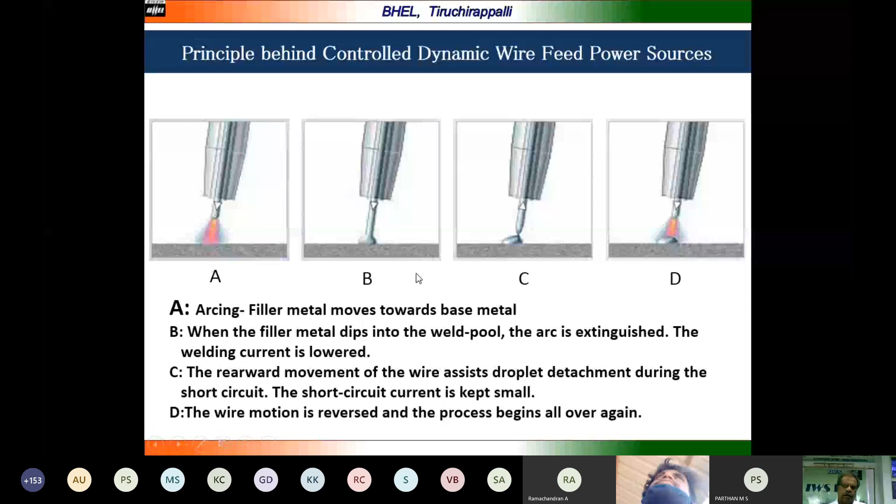It is for welding of filler metal aluminum Si5, 1.2 mm, with argon shielding gas, current of 73 amps, voltage of 15 volts, wire speed 5 meters per minute, and frequency of 63 hertz. These parameters are used, and this process has been developed for years and is now available.

Many research institutes and industries are using this process now, especially automotive industries. It's a typical application of cold metal transfer shown here in the waveforms also, welding of plates and tensile tests, similar and dissimilar welding, all shown here.

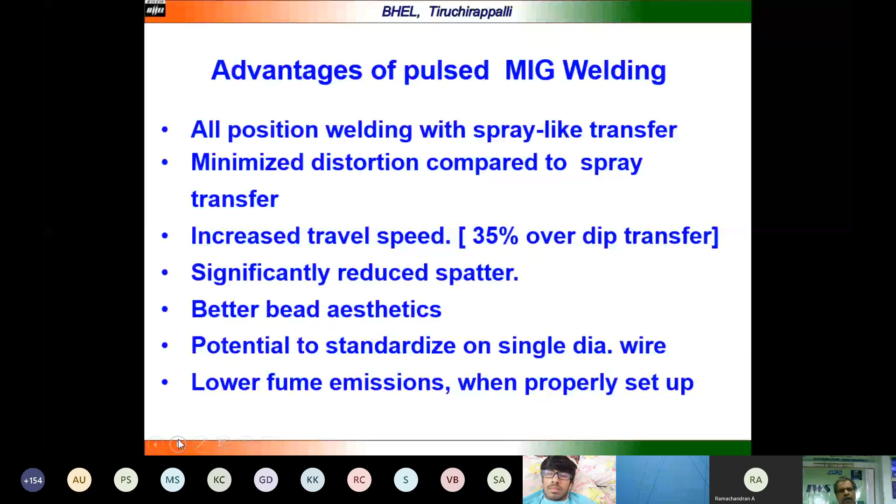Pulsed GMW is used to achieve spray type transfer even at low mean currents, to minimize spatter, and achieve all position welding capability and the advantages told earlier. These are the conventional GMW compared with the modified GMW waveform controlled processes.

The two other processes you are going to see are the tandem MIG welding process and the rapid arc welding process, where high current can be used, so they are called high performance GMW processes. Even the deposition rate can go up to 25 kg per hour very easily with this process.

This is a tandem GMW process where two filler wires come from two different power sources through a single torch, and welding can be done very easily. Using two wires and the same weld pool to deposit the welded metal, the deposition can be almost double, or 168% higher productivity can be achieved.

There is a synchronizing system available to ensure the feeding is going right and the welding can be done in a better way.

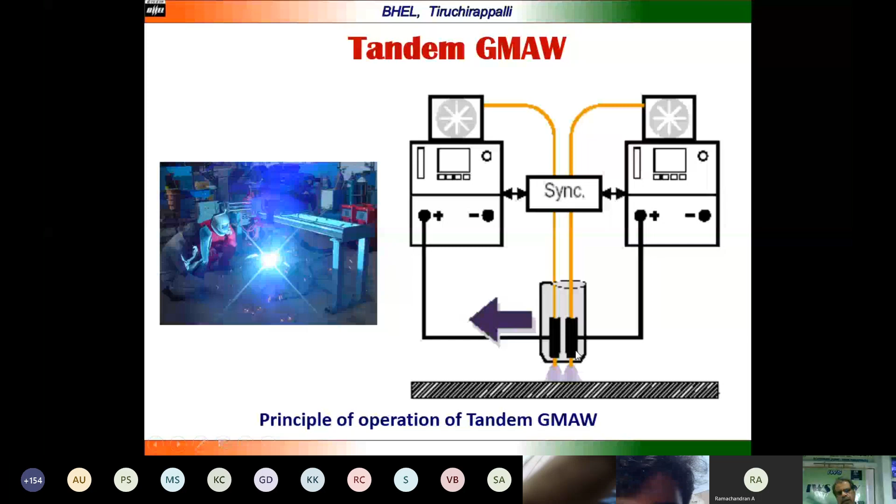It's normal TIG welding, normal MIG welding process, everything the same except that there are two power sources and two wires coming into the torch. That is the difference between normal GMW and tandem GMW.

Advantages are high welding speeds, faster cycle time, reducing heat input, resisting burn through on thin material, low spatter levels, and good penetration on thick material, steel and alloys, chrome nickel based alloys, and aluminum alloys can be welded easily. Fillet and circumferential welds can be done, mechanized and automated easily for industrial applications like shipbuilding, tank construction, and railway rolling stock.

This is conventional TIG welding compared to the arc in tandem GMW process. You can see two arcs in the same weld pool, with two separate wires being deposited here.

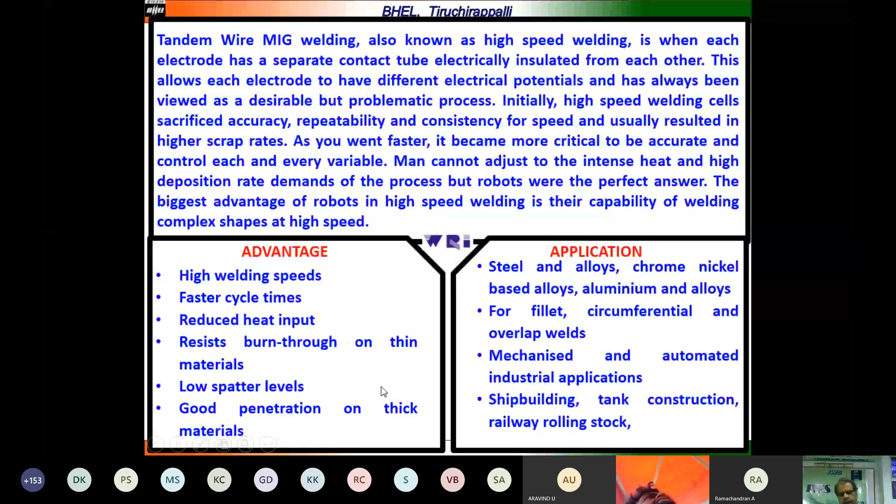This is the construction arrangement of the tandem MIG welding torch, which can be applied for welding items such as ribs on shafts. Using this process, you can deposit very quickly and reduce cycle time by 50%.

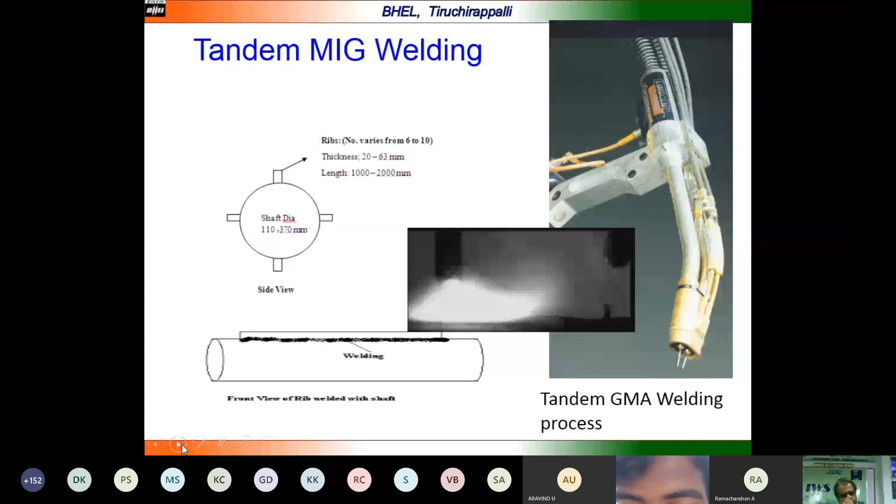As mentioned earlier, tandem GMW can be automated and robotized very easily for various applications. Here we see welding of a plate in vertical position using tandem MIG with a robot, which can weld very easily.

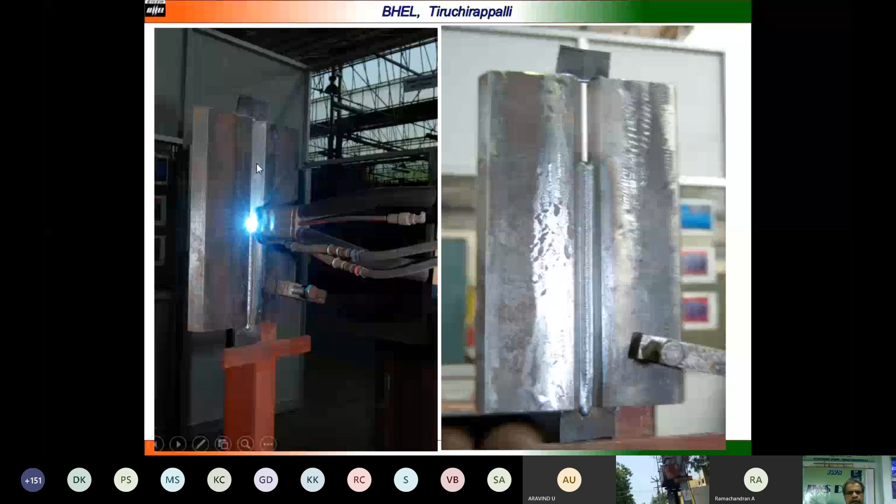It is welding in the downhand position, and welding with carriage. We can use it, and with robot we can use the process. These are all single wire GMW and tandem GMW. You can see the reduction in number of passes and layers so that the mechanical properties can be improved and the deposition rate can be improved.

The truck wheels can be welded by using this tandem GMW process very easily for better weld quality. The LPG cylinders are welded by using the process, and almost now the Welding Research Institute is also developing the process. Hope they are using the process now, or I don't know whether they moved to some other process.

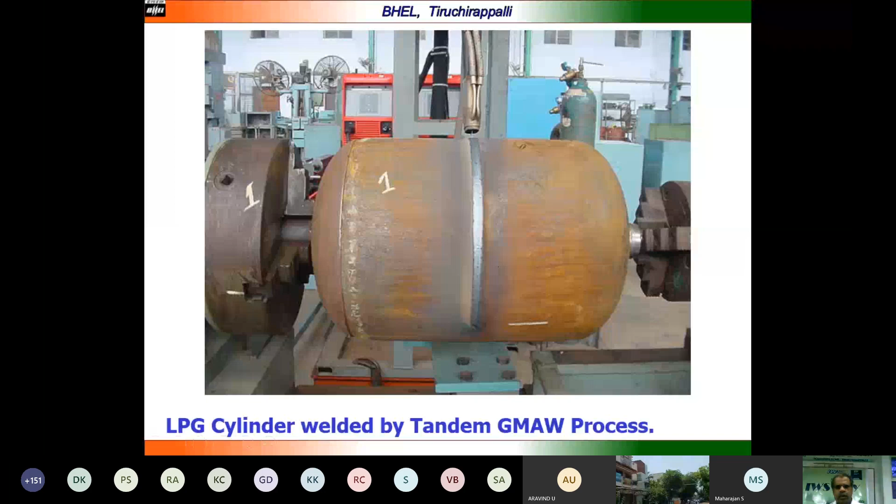Benefits are 40 to 80% over single wire, higher deposition efficiency, increased productivity - all these are available in the process. We are seeing the experimental setup we did for making the weld here, and the power source and all the things here. These are all advantages of the tandem wire GMW process.

The self-shielded process is nothing but a self-shielded welding process. Like GTW process, GMW process also cannot be used in open air condition, but the self-shielded flux cored wire developed by Lincoln Electric and other people is quite useful. You can do the welding even in open conditions.

Only thing, the fume generation is very high, and personal protection equipment for the welder should be available. This can be used as a continuous wire welding process in place of shielded metal arc welding process for structural applications very easily, and we can produce high quality welds without much fatigue for the welders.

Robotic GMW is not a new development, it is a marriage between GMW and robots. I want to show some applications here, so I am using slides to show you the application of robotic GMW. Robotic GMW can be used as I shown here earlier.

LPG cylinders are welded by robotic GMW process using tandem GMW. Truck wheels can be welded, and this truck wheel welding by tandem GMW is shown here. Again, this is a GMW process application. You can see what's in the video here.

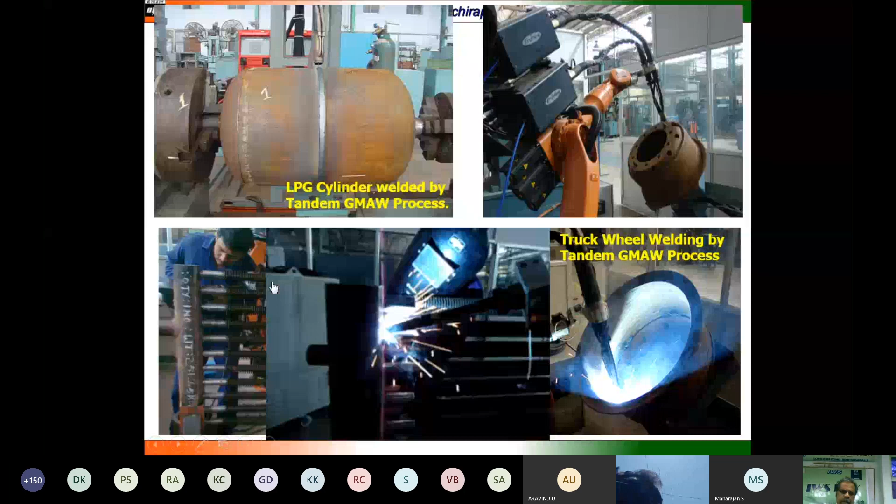Such assemblies are used, and there we can use the process for welding. You can see the welding is completed now. One pass of welding completed, second pass has to be done.

See the welding we did with the robotic GMW process. You see, it's a solid wire welding process what we used. See the weld quality and the bead shape and everything - it is better actually. So welding robots are used for all these things, as you know about robotics.

Talk about robotics here - robotic welding can be used for such applications, like attaching a nipple. The only problem is the nipple should not have any complex shapes; it can be straight and short, then robotic welding can be applied easily. Otherwise, it is very difficult.

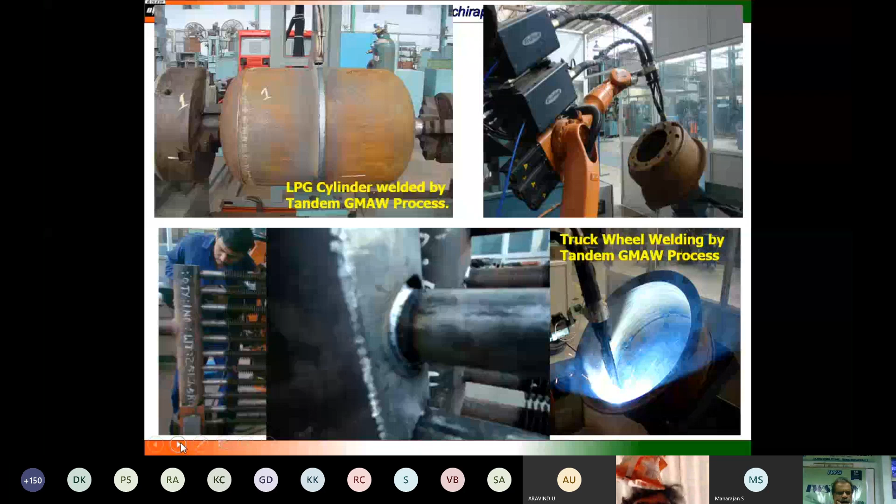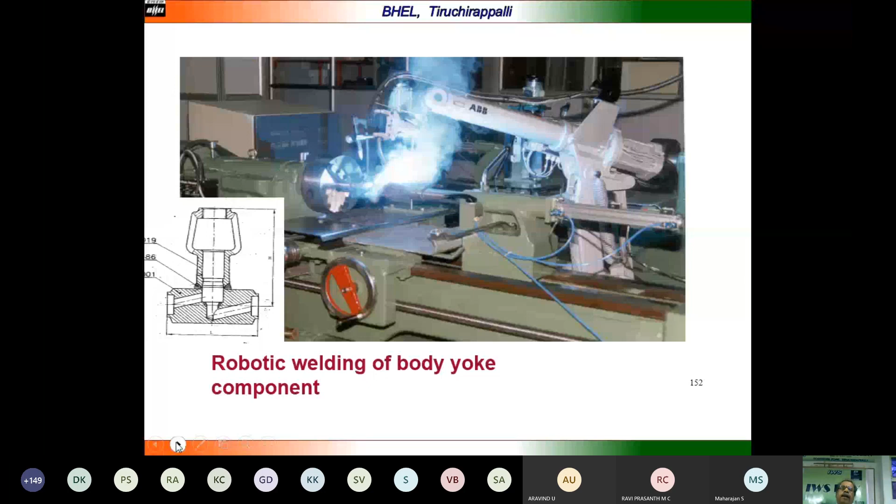Robotic welding means a robot is used for the weld - you can see here, it is a robot and the welding head is used here. What the robot does is the weld torch is connected to it, then it is programmed, and that's robotic welding - a robot is used for welding.

You can see robots are used for so many applications - material picking, material movement, all these things. Here it is used for welding. The welding operation robot may be 6-axis, 5-axis, or 7-axis, depending upon the application of the robot. But since what is delivered here is the welding, it is called robotic welding head or robotic welding operation.

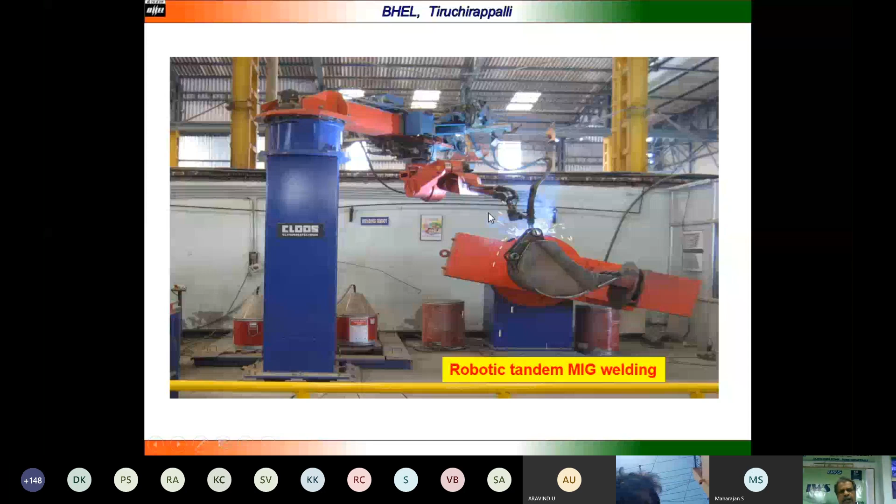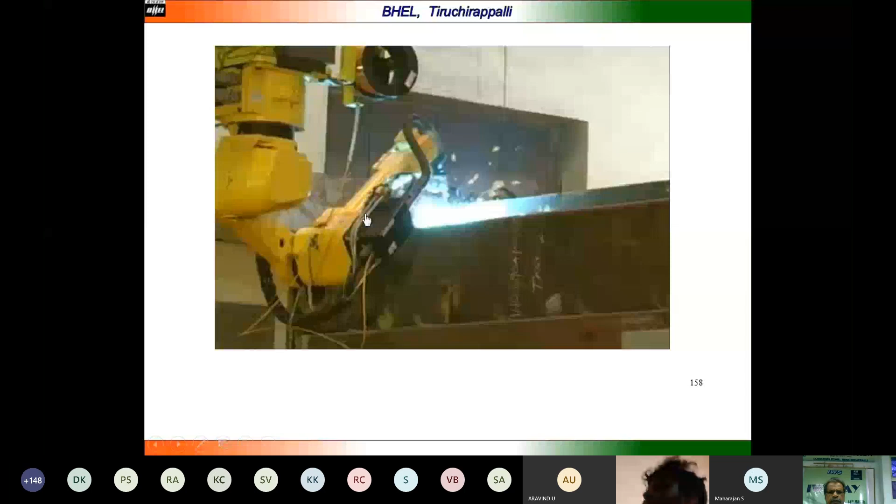Using this, the leakages in high voltage transformers meant for power plants have almost been brought to zero, and the build quality of the transformer has enhanced tremendously. We are able to produce zero defect transformers nowadays because of this application.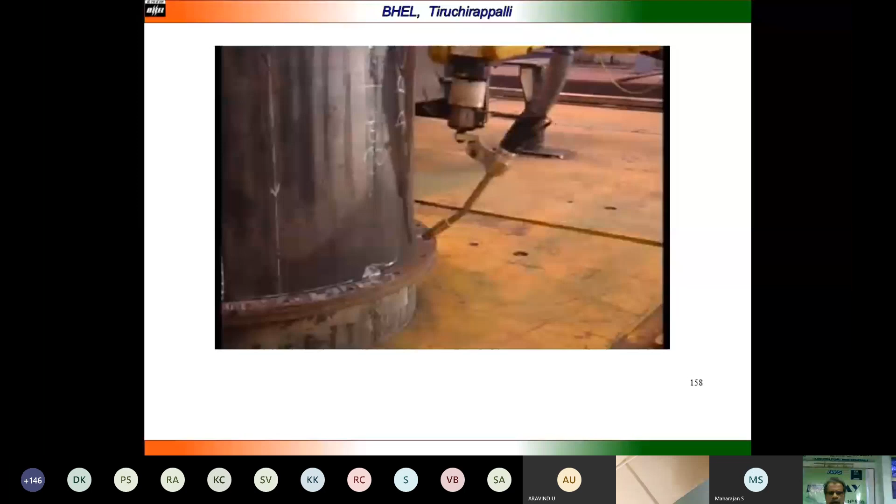How does the robot move in the X and Y axis? You can put it on rails and move it along the x-axis and y-axis. You can have a crosshead on the two beams, and the head can be moved - the robot welding head can be moved.

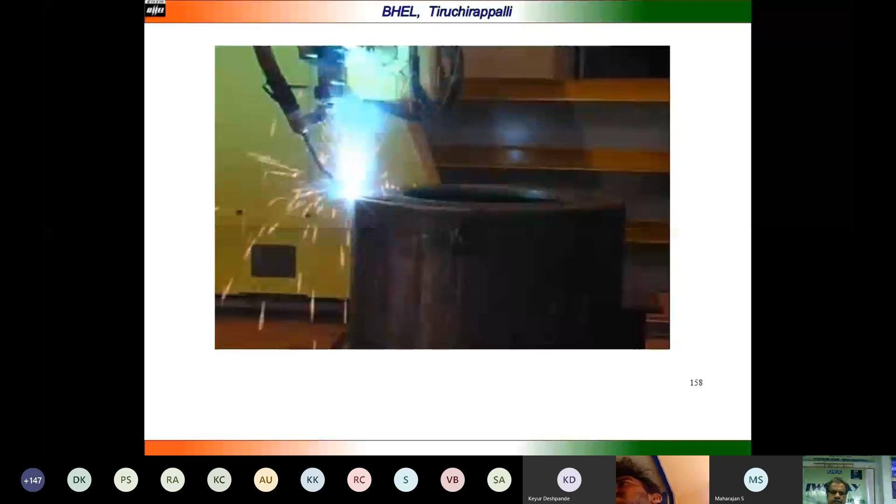These are some of the welds made for a transformer tank. This is what you are seeing in the final product here.

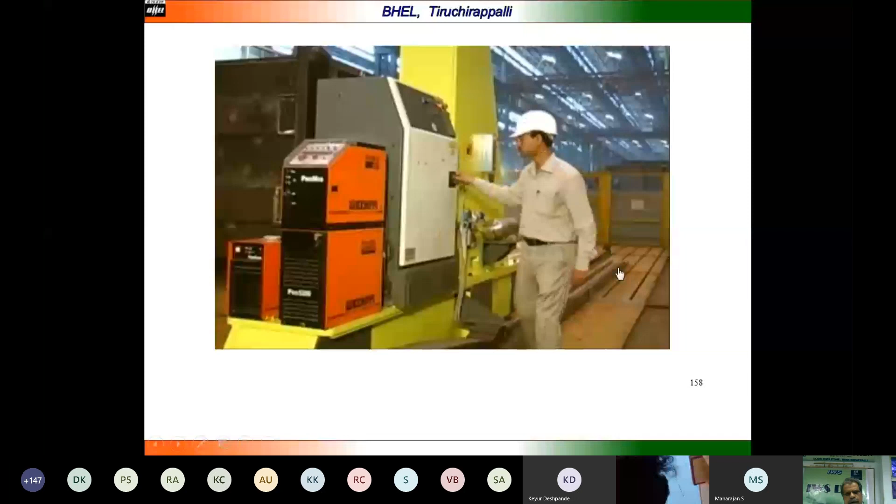There was a question about how that axis is moving here - I want to show that again. You can see this is a column, this is a rail. Along the rail, the gantry robot can move, and then it can move crosswise in the y-axis also. All the 5 or 6 axes given in the robot are also available, so the robot can move crossward as well as longitudinally, and the welding can be done.

Laser hybrid welding is another hybrid welding process where laser welding and the GMAW torch can be used together. It can be laser leading or laser trailing depending upon the torch laser position and the GMAW torch position. It combines the deep penetration capability of laser with the edge bridging capability of arc welding, and laser hybrid process is most popularly used all over the world.

Are you just reading? Which one? Hello? Hello? I think, sir, any questions? Can you please raise your hand and ask your question, sir? Okay, sir, we will go ahead. No problem, sir, okay.

It's a laser hybrid welding process - again robotic, added to the robot. Only the head will be there, and this laser hybrid welding process can be used for welding such capacitor boxes.

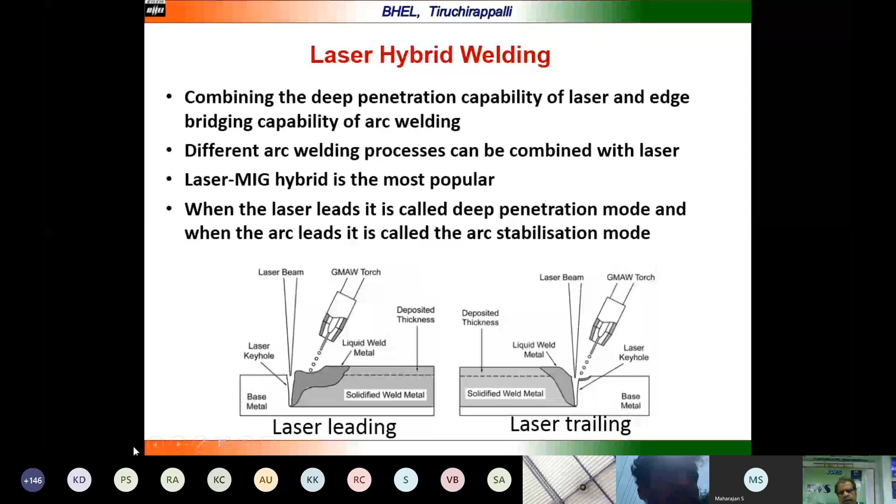We can achieve very high welding speed, and process stabilization is very easy. Increased thermal efficiency and greater workpiece tolerances can be obtained because any gap can also be welded very easily. Less distortion and post-straightening work can be avoided when using laser hybrid welding.

This is a weld made with laser welding, this is MIG welding, and this is the hybrid welding process. You can see the lack of fusion here with low weld metal deposition, but here it's full weld metal deposition - that's the advantage of more deposition. High quality deposition can be achieved using laser hybrid welding processes.

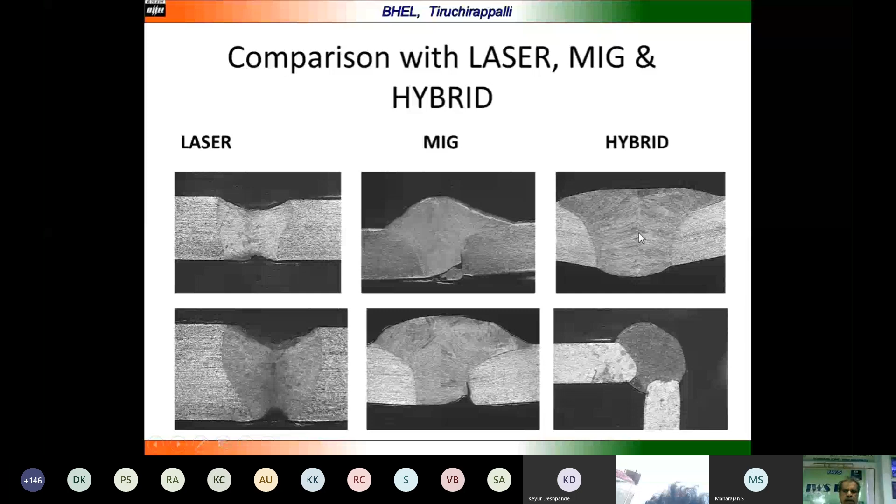These are some of the advances in GMAW processes, and there is one more process called rapid arc and deep penetration weld, I think. I missed the slide, or it will come later - I think the slides are misplaced somewhere. Anyhow, let me check and come back.

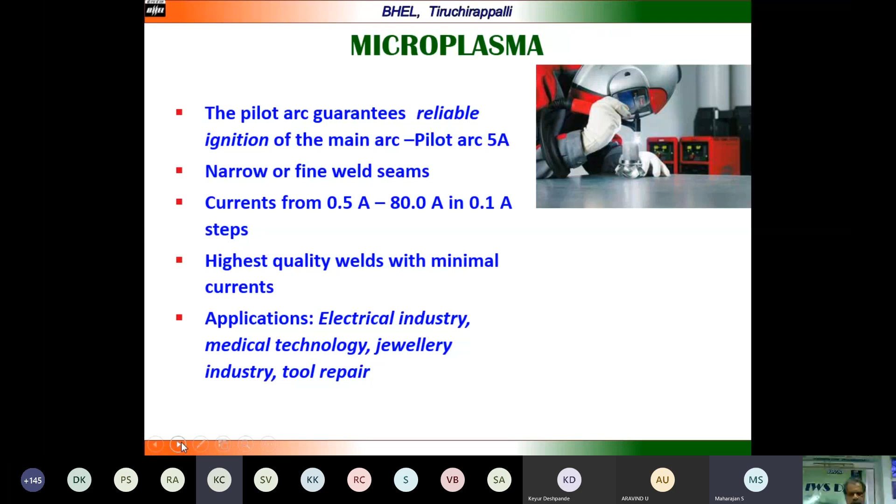Hello? Yeah, no, actually I'm - yes sir, not able to see the raised hands actually here.

Economical substitute for costly laser welding, for welding of foil thickness of 0.1 to 1 mm, can be done in the microplasma welding process, and 0.5 to 80 amps current can be used.

Even stable arc can be achieved by using the current. No arc wandering, less sensitive to arc length variation, suitable for manual as well as mechanized mode of welding of carbon steels, stainless steel, everything here.

What is it? No, the sharing is there. Yeah, one minute sir, someone's sharing this screen. Sir, Kanagaraj sir is here. Kindly don't share your screen, sir.

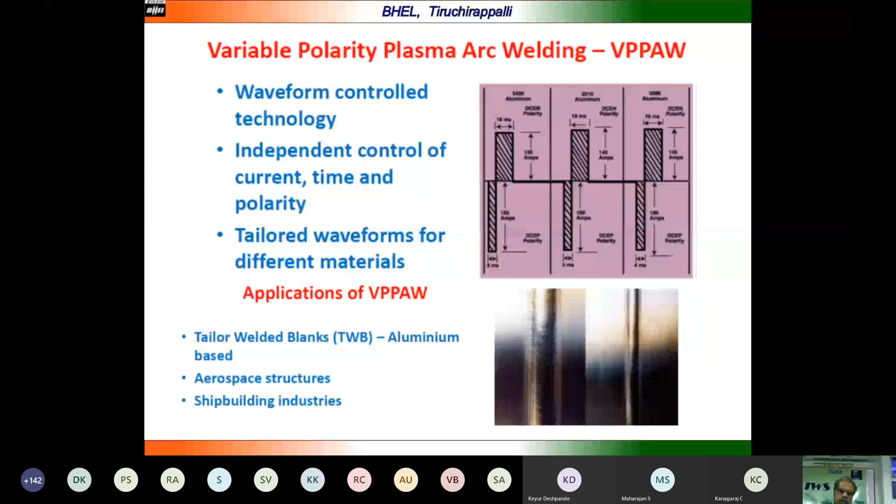A lot of research works and applications are going on in this process also in the country now. The welding of aerospace materials like AA2219, AA6061 materials with varying thickness, suitable automation can be used by this process, and ship hulls can be welded using this process.

And the keyhole plasma is the one we have been using for so many years. It is applied for pipelines, equipment, and container sealing etc. Here, a high power density on the workpiece creates a smaller weld pool with a hole, then the welding will be done. Yes sir, plasma keyhole welding is being done here.

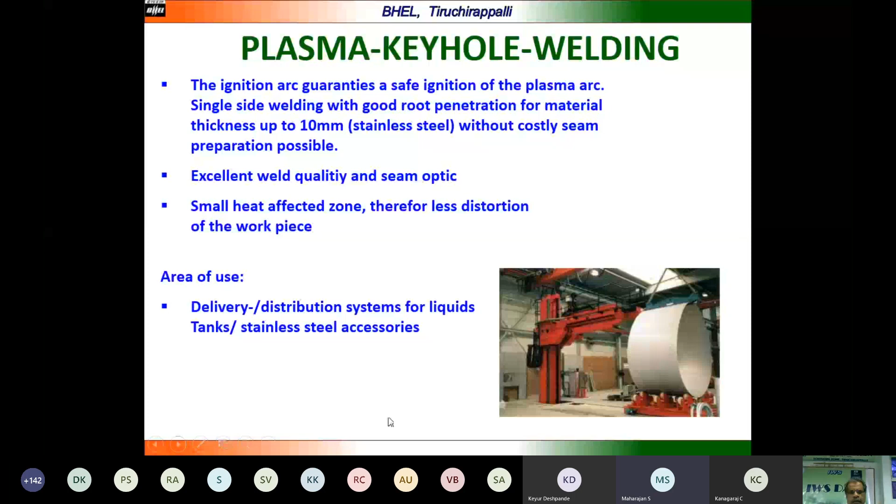Keyhole plasma power source is shown here. And plasma MIG is another hybrid technology developed in Israel actually.

A lot of claims are there by Israel, but I have not seen any route in India. Ador Welding has purchased a power source, but I don't know what is the condition now there. And we even tried to use the process, but we are not able to do that due to some other constraint. But it seems to be a good process.

It meets the challenges of increased demand, faster cycle time, and more efficient manufacturing for tube joining applications.

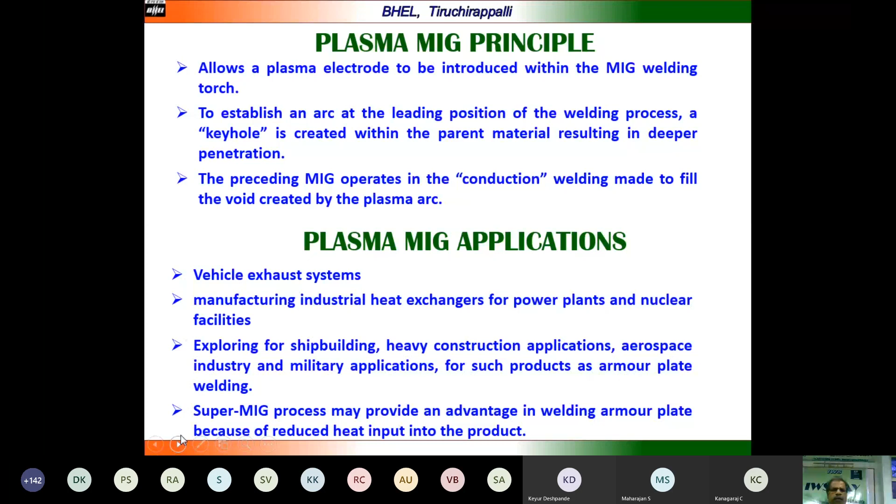To conclude my presentation, the recent technological advancements in gas shield welding processes and their industrial significance have been delineated here, with some learnings from WRI and my own experience. A welding engineer needs to know these nuances to make judicious choices in selecting the process variant for appropriate solutions to various industry needs. With that, I thank you all for your patience in hearing me out over the past one and a half hours.

Thanks, sir. Thank you very much for the wonderful presentation. Sir, I have one doubt, can I ask?

Sir, how do we measure the voltage of a power source for open circuit voltage in welding?

It's a power source, same as any other transformer used for welding. Usually we measure welding voltage using a voltmeter. For open circuit voltage, when welding, we measure it without connecting the welding torch. I am not an electrical engineer, I have not seen that process myself, so I don't want to say anything incorrect. I will check and come back to you.

Okay, thank you. Any other questions? Please raise your hand, unmute yourself, and ask. The voice is breaking so much.

Good morning, Mr. Rajshekharan, this is VR Mule from Mumbai. I am not able to access the chat here, that is why I requested the PPT. Can the organizer send the entire PPT or recorded proceeding? I have replied in the confirmation email for this webinar, we will definitely send it.